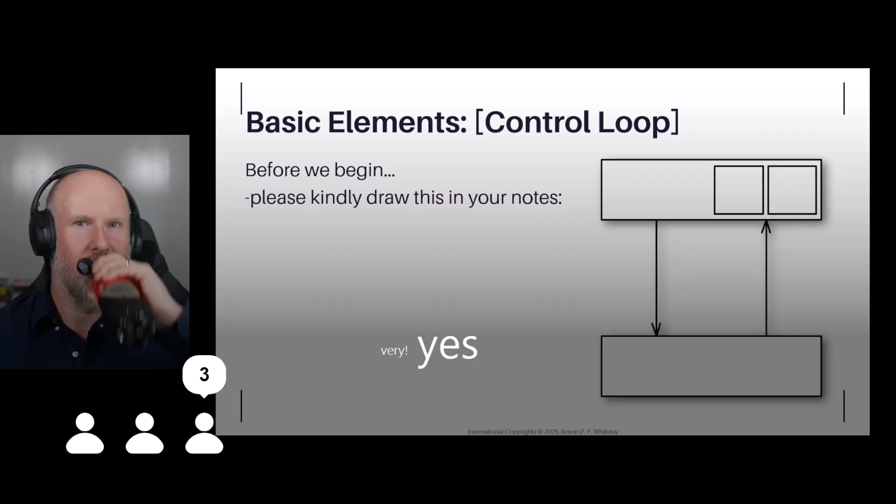Okay, that's good. Right, so this is a very basic control loop. And this, for me, is one of the two main core concepts of what STAMP, STPA and CAST are all about. If you can master this concept, it will move things on tremendously. So what we've got at the top here is what's called a controller. That controller can represent a human, an organization, a group of humans, a technical controller, a software controller. And of course that controller has some form of decision making within it, which helps the controller decide what control actions and when those control actions should be provided. Those control actions are provided to a concept called a controlled process.

Now, if you imagine you driving your car, you are the controller. The control process in this case is the movement of your vehicle from A to B. You're directly in control of your car and you provide control actions and receive feedback from the car and your environment, which helps you make decisions about how fast to drive, whether you should press the brakes or turn your headlights on or off. You also have beliefs about that control process and about yourself and your capabilities. Those beliefs, more formally, would be referred to as a process model, or mental models if we're talking about a human controller.

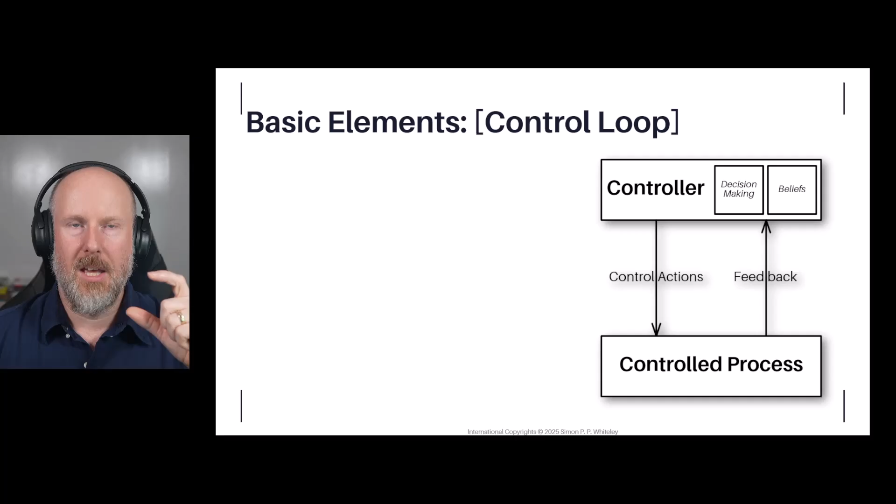And this, for me, is the most important core concept of STAMP. I like to talk about this in the context of being a jigsaw piece. Whenever we're doing any kind of STAMP-based analysis, whether it's STPA or CAST, we're looking to identify these jigsaw pieces and then see how they fit together in an overall control structure model, an overall jigsaw.

So this is why I like to use the second metaphor of a jigsaw puzzle. When we're trying to build a control structure model, they're essentially made of all little jigsaw pieces, little control loops, little control structures, and how they fit together overall. You'll see in a moment some examples of that when we get into the case study.

So on a scale of 0 to 10, what I'd like you to do is type in the chat how familiar you are with systems engineering as a concept or discipline. If you don't know anything, it's 0. If you know everything and could teach a course on it, type 10 in the chat. Over time that number will stabilise. Bear with me.

So we've got some good numbers in there. We've got a few lower numbers, we haven't got any zeros so far or ones, so that's good. That's fine, Mark, I can deal with that. That's good. Jose says 10, but he's always learning.

Great, Jose, fantastic. Okay, so in terms of systems safety engineering as a discipline, on a scale of 0 to 10, give me an indication of where you are. 0 is you don't know anything, 10 is you could teach a degree on it. Got some 10s, some 6s, some 10s, yep, okay, that's good. So that's a bit more variable, that's okay, it's not an issue.

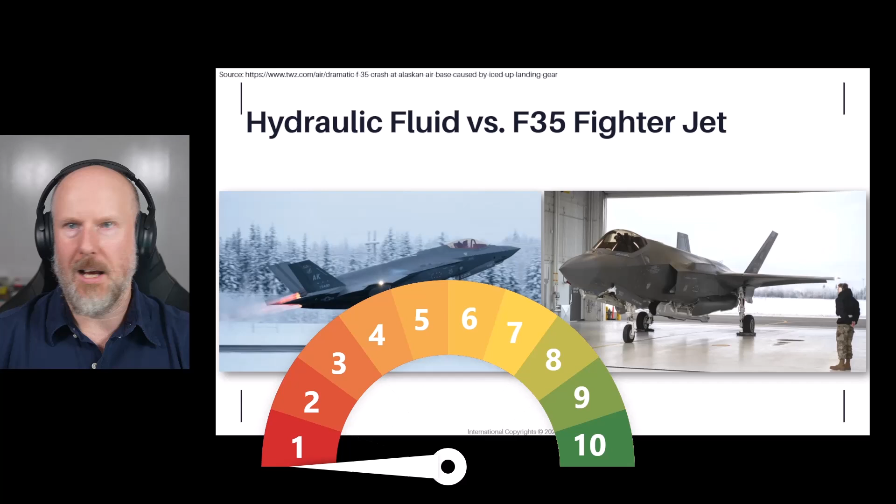So fantastic, okay, so on a scale of 0 to 10 then, how familiar are you with this accident? Have you read the report? Have you watched the 5 hours of live streams the other week going through the report? So Ruben's got 0, thanks Ruben. Martin's got 1, that's fine, no worries. James has got 8. Great, James can lead the session, I think.

Thomas has got 4, Raji's got 0. That's fine, that's not an issue. We could talk about it.

So it's about this aircraft. If you're not familiar with this aircraft, this is a Lockheed Martin F-35. I was just about to say Joint Strike Fighter, but that's not the right name anymore - Lightning II, I think it is. And having seen it at the air show, it is very loud, absolutely mind-blowingly loud. Single engine aircraft, very cool looking, very stealthy. And the F-35B variant, the VTOL, vertical takeoff and landing variant, is a sight to behold. But this is the A variant, a conventional takeoff and landing aircraft.

Now, these pictures are borrowed from the website of the news article when I was first aware that this report came to being, and these pictures are representative of Eielson Air Force Base. So in January, it's clearly very, very cold and wintry. And on the right-hand side is a picture from inside the air-conditioned, climate-conditioned hangar, so it's kept in a nice warm environment so people can work on it and not be exposed to the harsh environment.

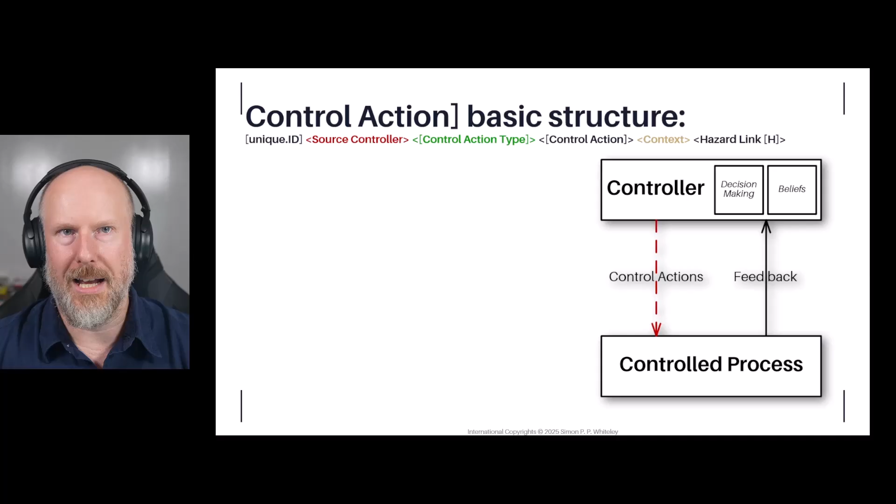I'm not going to go into too much detail since we've got a lot to go through, but these are the general types of unsafe control action. All control actions are broken down into four categories. The first is the control action is not provided when it is required. So if you don't provide the control action when there's somebody in the road, that's a control action not provided with that context.

But there are other versions of provided. So if instead of the brake command you provide the accelerate command with that particular context, is that unsafe? Well, yes it is. But is there a particular variant of that provided control action?

We've got timing - timing early, timing late. So if we provide a brake command too late, or don't provide it long enough, that's too short or too long. And for particular types of control actions there might be a sequence involved. If you're thinking about ready, aim, fire with weapons - if you fire before you're ready or before you've aimed, could that be dangerous? Yeah, probably.

And then finally, magnitude. Magnitude is a special case that's not included in the official literature, but I always include it to emphasize that if you're working on a system with analog controls or analog feedback, or interactions that involve magnitude, you might want to include that as part of considering your unsafe control actions. But as I say, it's not officially part of the literature.

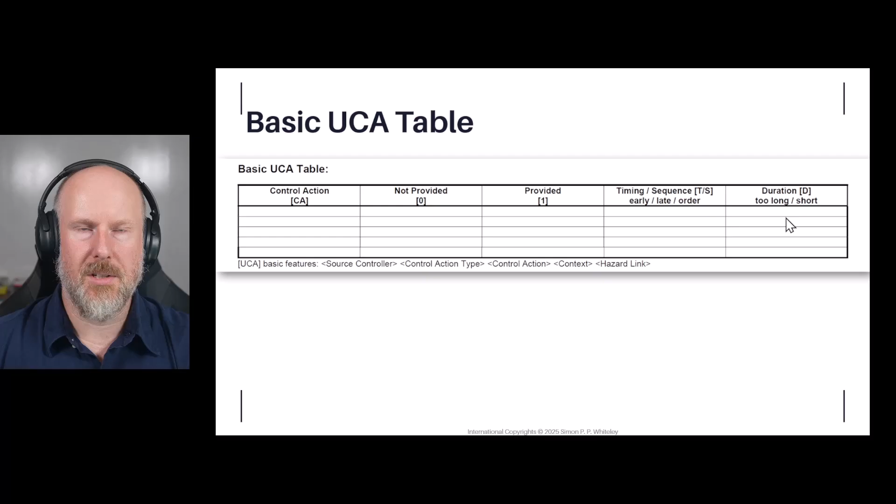And then when we do the control loop analysis, the causal scenario or loss scenario analysis, this is where we look at the different elements of the control loop. Here we look at the controller behavior itself - why does it make sense for the controller to provide that unsafe control action? What issues does it have with its control algorithm or decision making? What about its beliefs or its process model? And then also, what about the sensors or feedback? Is the feedback adequate or inadequate? Are there any delays, or any other data or information that's missing, incorrect, or perhaps lying? And then we've got the control action path.

So how does that control action make its way from the controller to the physical control process? What actuators are involved? Perhaps the actuator provides the control action when the controller hasn't provided the control action.

And that's a completely different scenario to if the controller provides the control action, but the actuator doesn't then enact that control action. And then finally, we've got the control process at the bottom.

What are the aspects of the control process where it might behave as though it has received a control action, or has not received a control action? And of course, are there any other external disturbances that are not directly related to this control loop?

And then in terms of results from hazard analysis, we've got the high-level safety constraints I mentioned earlier on, the control structure architectural constraints, the controller functional safety constraints, and then the safety constraints for the control loop, the feedback, the sensors and actuators, things like that. And they're broadly labelled as stamp-based analysis constraints, if you're doing an STPA.

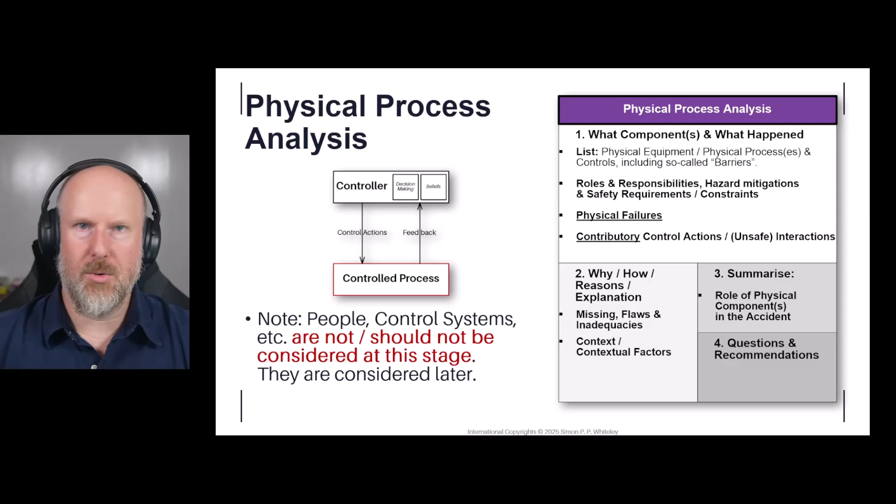And you might identify questions and make recommendations that, as you start to learn more about the control structure and the behavior of certain controllers, might change those questions, might answer those questions, or the recommendations you might make then become invalid later on as you progress through the analysis. And then in terms of the second and third part of the CAST analysis phase, we have what's called in the literature component analysis or controller analysis, because we're looking at the controllers in the structure.

We identify what safety-related roles and responsibilities they have, any explicit safety requirements or constraints. We'll then explore their control and feedback ability. What are the issues? Were there any issues with actuators and sensors, or any failures? So we're looking at the controller, actuators and sensors perhaps.

Then we've got contributory control actions or interactions. You'll notice that this is different from STPA. We're logically talking about exactly the same control actions and whether they contributed to the accident or not. But of course, when we're doing an STPA, this is before the accident. So when we identify a control action that will lead to a loss, that is clearly an unsafe control action.

But in the context of a real accident, you might have a situation where a controller provides a control action, believing that it is the right thing to do, the safe thing to do, but that actually contributes to the accident. And of course, they wouldn't know that it contributed to the accident before they did it, because if they did, with hindsight, they would not have logically done that.

So this is why it's important to recognise that contributory control actions in CAST and unsafe control actions in STPA are logically and functionally the same, but we just have to be careful about how we treat them post-accident, because we don't want to suffer from hindsight bias. We want to reduce the potential to be overwhelmed by hindsight bias.

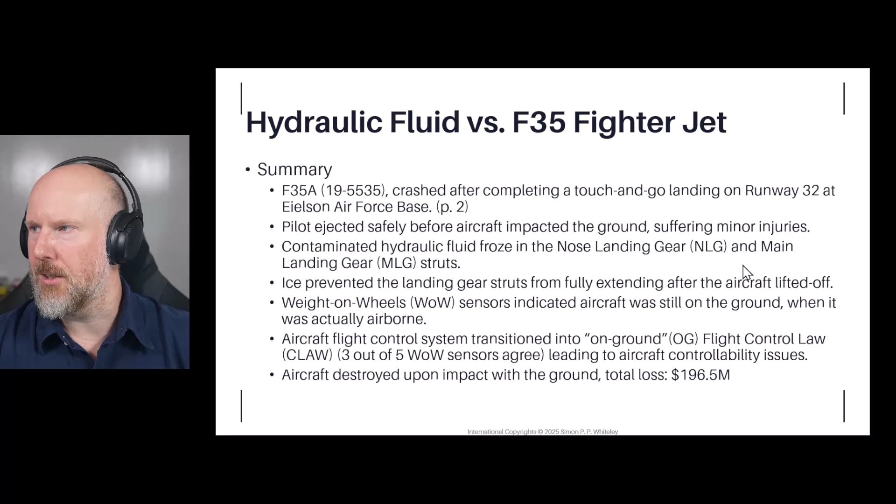Ice prevented the landing gear struts from fully extending after the aircraft lifted off. The weight on wheel sensors indicated the aircraft was still on the ground when it was actually airborne. The flight control system transitioned into on-ground flight control law. Three out of five weight on wheel sensors agreed, leading to aircraft controllability issues. The aircraft was destroyed upon impact with the ground, with a total loss of $196.5 million. So it's quite a big, expensive accident, this one.

I think everybody's quiet. Either I'm doing a great job or I'm not. Let's move those things out of the way so I can see what's going on. So Aidan said something, there we go, let's get that on screen.

Aidan says the hydraulic barrel was left outside in inclement weather for at least 6 weeks. This was in direct violation of Air Force regulations, which require that hydraulic fluid be stored in a container tightly closed in a dry and well-ventilated place. Additionally, the hydraulic barrel used to service the aircraft had been marked empty, consumed in April 2024, but had not been disposed of. Even so, it was in use, and when tested it contained about 33% water. So that's, in a nutshell, the cause of the accident.

But there's more to it than that, and we will see that as we go through this case study. So let's go to this bit. Slides, large. No, that one. There we go.

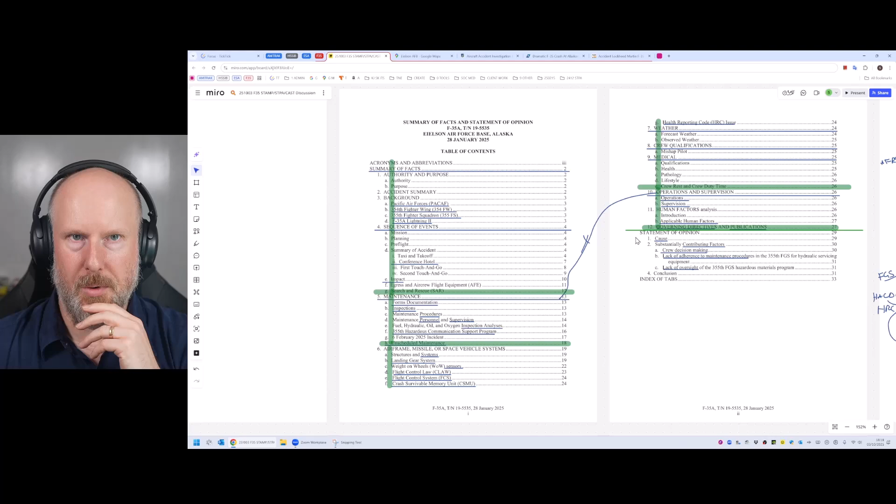Jose says he didn't have time to study it, but weight on wheel sensors and CLAW called his attention. Absolutely. So what I've done here, if you've seen the videos at all, is essentially I went through the official investigation report with a marker pen, underlining things and talking through it, working through it over the course of about 5.5 hours over 2 or 3 days. As I went through it, I extracted relevant information that might make sense for the control structure, bearing in mind that if you're doing this as part of a real investigation, you will receive notification that an accident has occurred with some initial information, which is pretty much always going to be wrong. And of course, when you're starting your control structure, you will identify candidate controllers that might or might not be relevant to this accident, and whether you want to include them. So what I do is identify them as jigsaw pieces and put them to one side.

And then as I get more information, I will take those candidate controllers and start arranging them in a broad hierarchy, and then see what the interactions are, what the control actions and feedback are.

James has made a point: hydraulic fluid is hygroscopic. So why is ice formation with contaminated hydraulic fluid a surprise and not checked at every service? That's a fantastic question. That's not addressed in the investigation report.

James says its text is hard to read. Sorry James, I was just quickly going over the report itself to give you a view of what it looks like, not in detail. So this is the layout of the airfield.

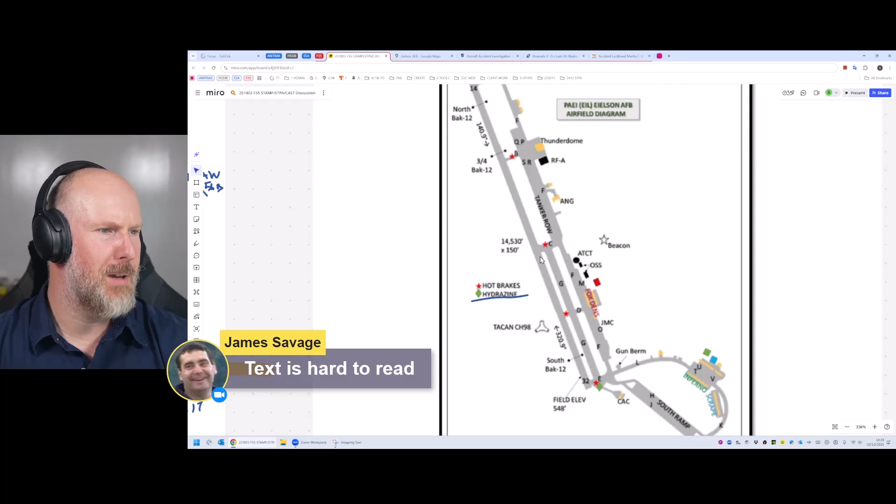I can't remember where the impact location is. I think it's... where is it? Oh no, that's not it. I thought they'd marked it on this. Maybe it's marked on a different one I've seen. But that's the overall runway layout, airfield layout.

Yeah, so it's quite an extreme thing to witness. When I first saw it, I was shocked. The first thing that struck me is, why is it falling out of the sky, tumbling down? There's something wrong with the flight control system if it's doing that.

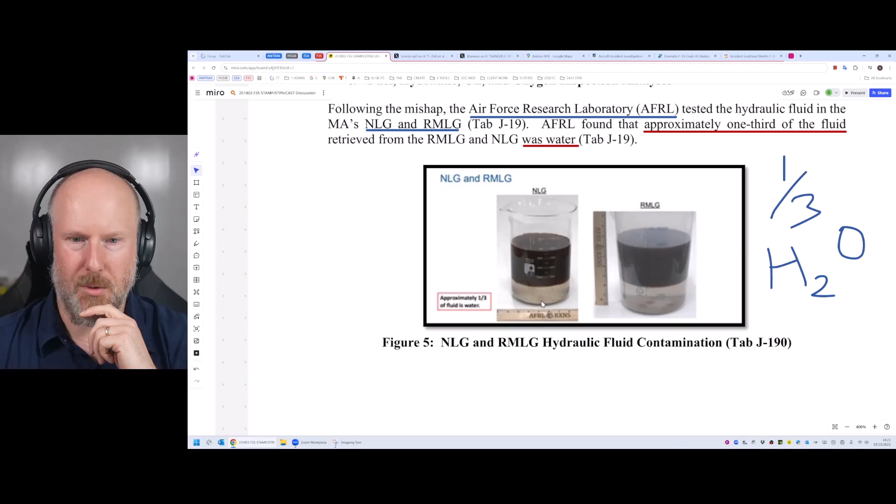So yeah, and then we go across to this picture here. This is a bit of a better picture. This is the nose landing gear fluid, and then this is the right main landing gear fluid. Again, it's not good at all, it shouldn't be like that.

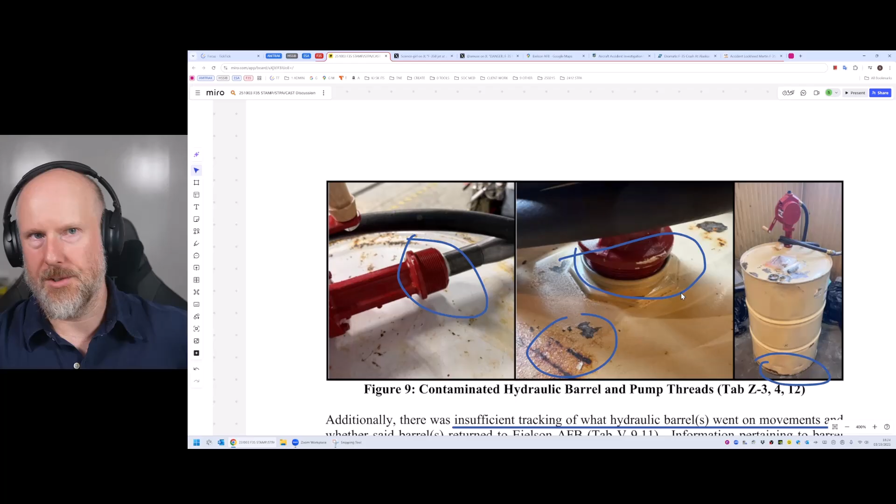And then this is the barrel, the hydraulic barrel, and you can see for yourself the barrel is in a bit of a poor state. There's surface corrosion, paint chips, it looks like it's been banged up a bit. And then this thing on the top, this is a hand pump to dispense the fluid out of the barrel into the maintenance cart, the hydraulic servicing cart. The thing I've highlighted there is that the threads on here are supposed to be sealed so that when it's in the barrel, there's a watertight seal. For whatever reason, not explained in the investigation report, that's not present.

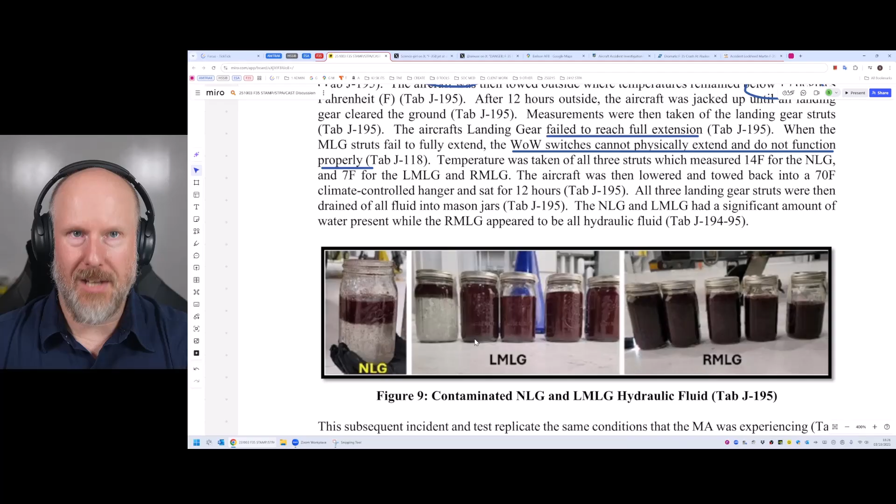So they didn't even know. Their mental model was that they didn't know there was an issue with the landing gear. So in my view, they were very lucky, I think. And on that aircraft, they also checked the contamination and found that the nose landing gear and left main landing gear was contaminated, but the right main landing gear was not. So this is a common mode of potentially losing aircraft.

These are the weight on wheels sensors. Now, there's a difference between the nose landing gear sensors and the sensors on the main landing gears, in that the nose landing gear sensor is a weight off wheels sensor, not a weight on wheels. So the logic that it provides to the flight control system is that we are off wheels, we're not on the ground, whereas the main landing gear has 2 sensors per landing gear that say there is weight on the wheels.

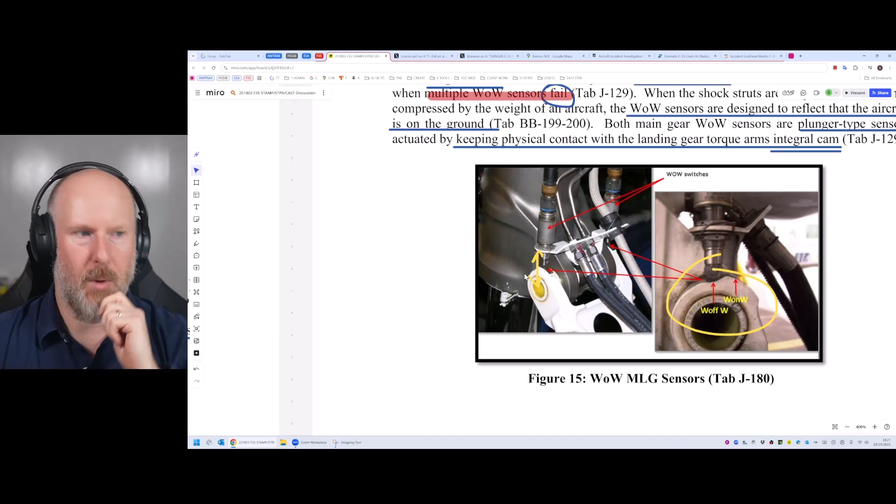Okay, what else can we say? Yeah, there we go, there's a better picture. So these are the 2 sensors there, and when the landing gear mechanism moves, they press the weight on wheel switches and they indicate weight on wheels. And there's the nose landing gear there. So it's a Hall effect sensor, and it's about weight off wheels, not weight on wheels.

Right, okay, so let's go over to here then. Like I said, I always start with this jigsaw piece. So whenever you're doing any kind of STAMP-based analysis, start with this jigsaw piece and build up from there, and then think about putting these pieces together into a control structure model.

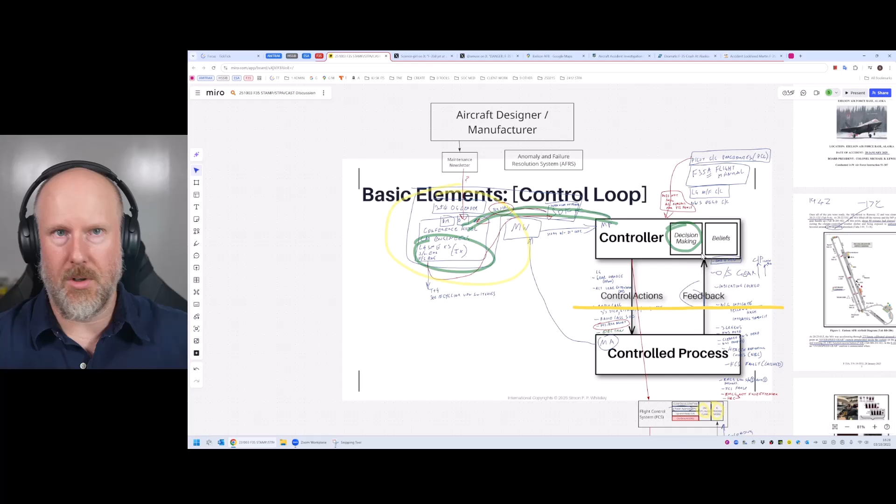And so in the case of the pilot, I essentially started at the front of the investigation report and started to pull out what controllers were involved, scribbled them on here. That gave me a preliminary idea of what the control structure looks like and what the potential unsafe interactions are.

And then also I did the same for the maintenance of the aircraft. So the hydraulic, putting hydraulic fluid into the landing gear using the hydraulic service handcart, which is filled up from a hydraulics barrel. Excuse me. But it wasn't clear in the investigation report who else, apart from the maintenance team, a level 5 and a level 7 maintainer, there were other people implied but not actually mentioned or apparently investigated.

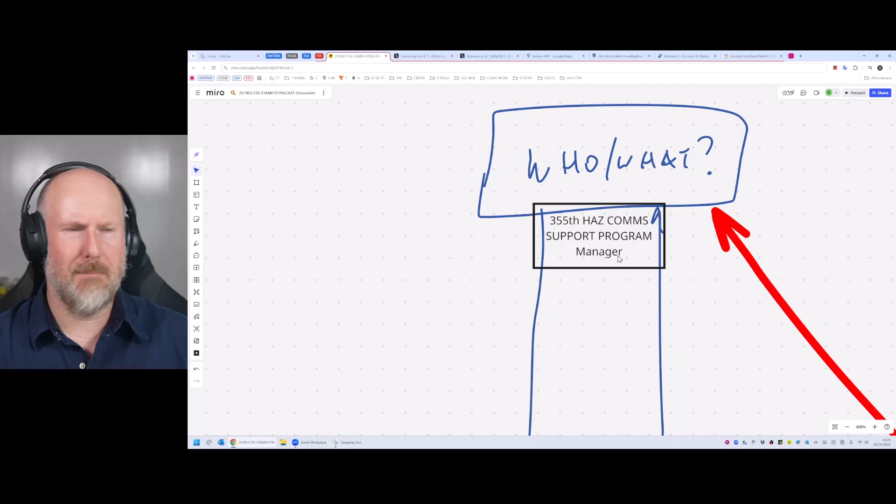There was a mention about the 355th hazardous communication support program manager, who wasn't in post. There was no one in that position. So arguably, that part of the control structure, there was nobody present. So it's hardly surprising that there were some issues.

So I essentially redrew those a bit smarter, a bit nicer. It's a bit more complex because I've added some detail to it. As I mentioned before, when you're doing your control structure modelling, it's a good idea to start with a very basic control structure, 3 boxes with a couple of arrows, nothing more complex than that, and then start to add details. You learn more as you start to understand more, and you go through iterative phases of adding detail and removing detail and refining it until you have a good control structure model that you can use for the basis of your analysis, and of course communicating with others.

Because when you're doing your own stamp-based analysis, you want a master model that captures all the information that's relevant to you. And then, when you're going to write this into a report or an investigation report for other stakeholders to review or consume, if you're going to publish a report in public, you're not necessarily going to want to publish your detailed control structure model because it's sensitive. You will want to publish something that's a bit more abstract. So you have to think about how you're going to model it. It's not straightforward. It comes with time and experience. But once you develop that skill, it'll become second nature.

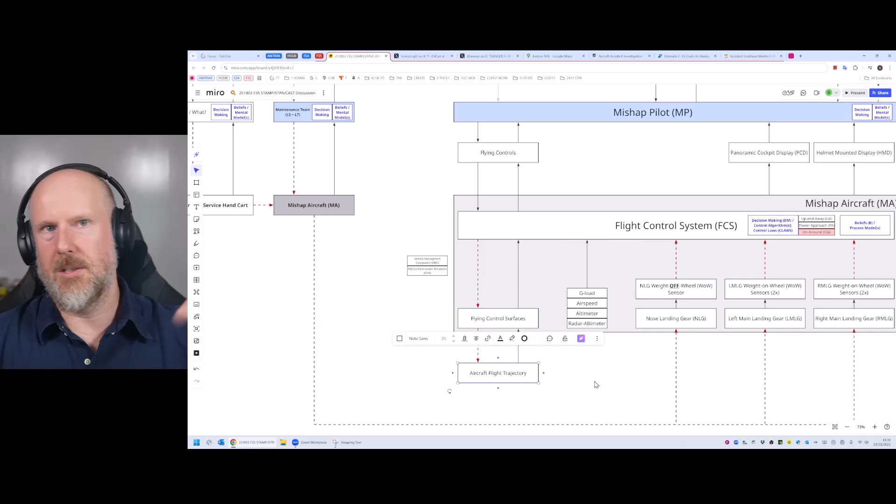So what I've got here is I've started with the physical process, which for this whole accident is about aircraft flight trajectory. Because ultimately we're talking about an aircraft that needs to fly, complete its mission, return to base and land safely, and everyone gets home safely. Now the flight trajectory as a physical control process is influenced by the flying control surfaces. I've not included the propulsion system, the engine or anything to do with that because it's not discussed in the report and I'm not convinced it's relevant to this particular accident.

If we were talking about the F35B vertical takeoff and landing example that you saw the video of a moment ago, we might want to include that in this control structure, but we're doing it for this accident, not for the F35B. So the flying control surfaces are under the logical control of the flight control system.

Now the flight control system has the same control algorithms, decision making and beliefs process model as a human controller, but in this concept it's more appropriate to refer to them as control algorithms. In fact, in the investigation report it refers to them as control laws, or claws. It mentions explicitly three types of control laws: the up and away, the power and approach, and then the on-ground control law.

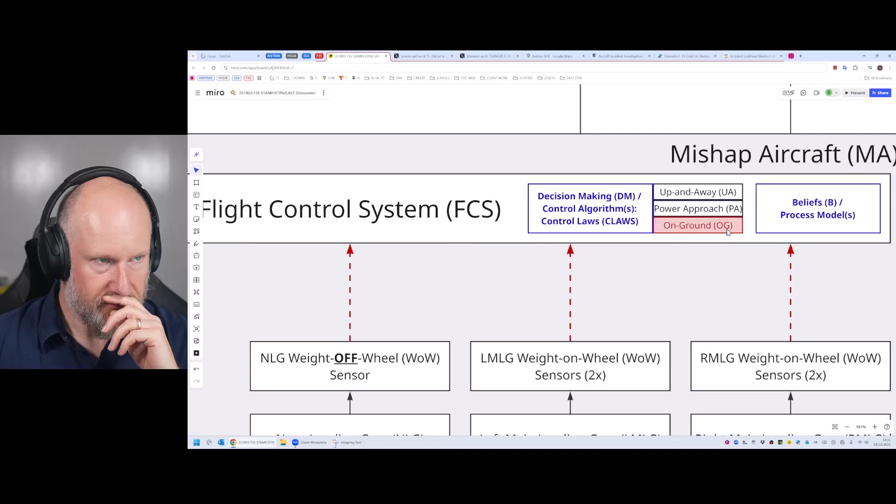Now the report talks about the weight on wheels sensors, so I've modelled them explicitly. You don't have to do that, I've just done it for effect here. So we've got the nose landing gear, we've got the weight on wheel sensors, and I've highlighted the nose landing gear as a weight off wheel sensor.

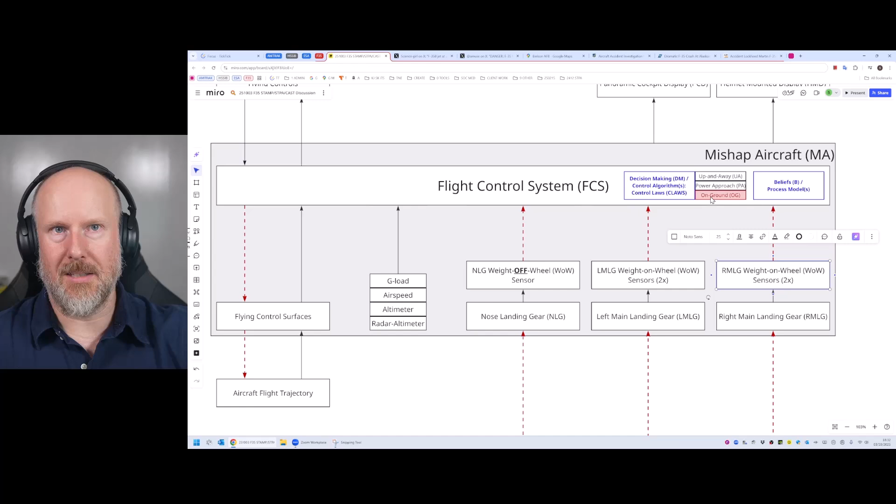They provide critical feedback to the flight control system. That flight control system updates its process models about the state of the aircraft, whether it's in flight or on the ground. So it believes, based on this apparently valid information, 3 out of 5 voting, that it is on the ground when in fact it's not. And so its decision making algorithm decides, based on that belief, that process model, that it needs to enter into on-ground mode control laws.

And it does that, and when it does, it starts moving the flying control surfaces as though it is on the ground, which if the aircraft is in the sky, is really not appropriate. It leads to an uncontrollable aircraft and a loss of $196.5 million. So fundamentally, straight away, from an aircraft perspective, we've identified the causes of the accident: unsafe control actions by the flight control system because it legitimately believed, in its context, that the aircraft was on the ground.

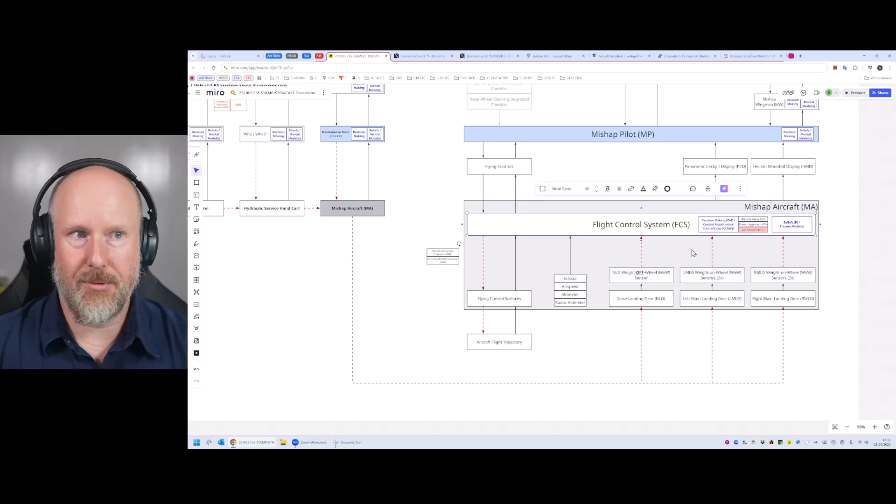So there's an immediate question there for the designer of the flight control system. Why does it make sense for the aircraft to select on-ground when it's actually in the air? What other feedback do those process models, those beliefs, have about the state of the aircraft to protect it from this precise scenario? Now, of course, they're not going to include that level of technical detail about a fighter jet, a military system, in a report like this because it's publicly available.

But if I was part of the investigation team, and I'm hoping you all, as part of the work that you do, will be able to ask questions like: well, hang on a minute, what feedback updates this beliefs process model? And do those false beliefs contribute to unsafe control actions on the part of the controller? And if they do, have we got a design issue here? Do we need more feedback to give us confidence that we're actually in the state that we are?

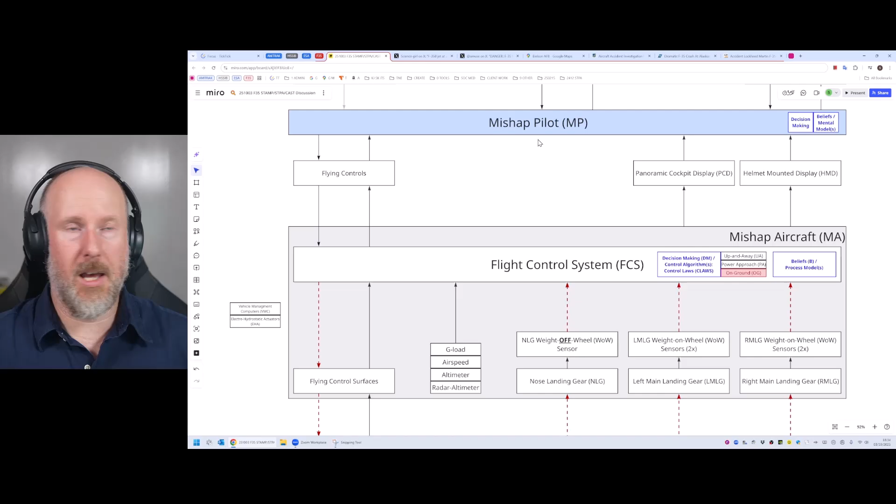Maybe we might also want to consider aircrew override capability. Can the pilot flip a switch that says we're definitely flying, we're definitely not flying? I'm just postulating there, but I'm hoping - in fact, tell me, what are your thoughts about this? I can bring you up and we can talk about it. Just type in the chat or raise your hand and I'll bring you on.

Jose says it reminds him of Air France 447. It is, it literally is.

I should probably do an Air France 447 case study, but it's such a huge investigation report, it'll take absolutely ages to get through. But looking at the summary of that accident, it's similar. In that accident it's also related to the crew - they were led to believe they were not in the state they actually were because of feedback from the aircraft. So there was not only a control system flaw from the flight control system perspective, there was also a flaw in the human-machine interface design of that aircraft.

Any other comments, questions, concerns, compliments? I'll keep going up the controls. Oh, someone else has said something.

James said something - there have been several other accidents where there has been similar mismatches involving WOW. Yes, there has, absolutely. WOW is particularly problematic. How much can I say?

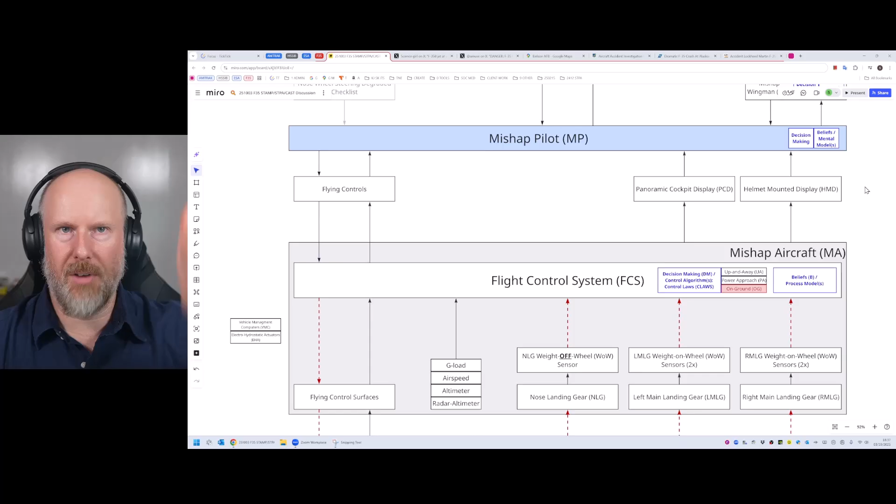I've been involved in some analysis of WOW-related fault tree analysis about 5 years ago now, maybe 5 or so years ago. It's not an easy thing to do because in that context I was doing analysis on the part of a subsystem supplier. The aircraft manufacturer did their own analysis and fault trees and decided their architecture for the weight on wheels system. But when I was doing the work, doing a bit of pseudo STPA in combination with fault tree and FMEA, I identified that perhaps their signal to us was not of sufficient integrity for the benefit of the safety critical functions we were working on. And of course that suggested the aircraft design for the weight on wheels signal was not adequate. But we didn't have full visibility of the aircraft manufacturer's architecture for that design - they only gave us a limited amount of information in the interface control document. So in this case I've not explicitly discussed the design control structure for the aircraft.

And in fact that is something we should probably talk about now. Ruben, I think you mentioned that - Ruben, are you still here? Ruben, you asked about... there we go, let's have a look. So Ruben says... probably not mentioned on the public report.

Looking at the flight control system software designer's mental models as a controller of the flight control system would probably shed more light on the causal factors.

Absolutely. In this context the only information we've got is in the official investigation report. But amongst the people in this room, I'm sure we can come up with some ideas as to why it would make sense for the flight control system designer and their software engineers to design their algorithms the way they are. It may literally be that the flight control system software engineers were told: these are the up-and-away, power approach, and on-ground algorithms. This is the only available feedback to you because of other constraints on the design of the aircraft.

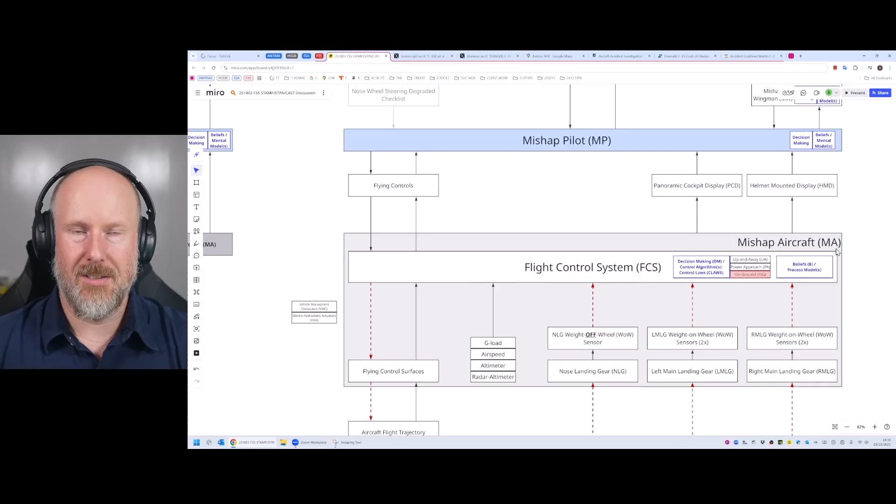I don't want to... let's play devil's advocate a little bit. Maybe, and I don't know how this works - I think someone else in the call knows a lot more about landing gear than I do - but if you're buying the landing gear from a supplier and that supplier says 'this is our standard landing gear for a fighter jet of this performance and these requirements, it only comes with weight on wheels of this design, if you want more than that for the benefit of your flight control system you need to give us $10 billion or whatever it is,' then maybe that's the reason. Or it could be that, and we can't know, but I'd guess there may be other flight control system reasons why they can't do that.

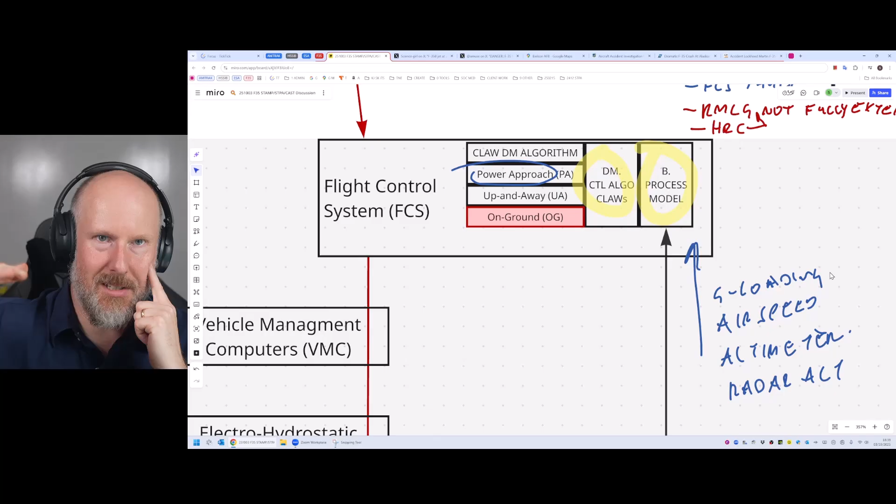Maybe... well let's say for argument's sake - in fact I drew it, I wrote it, there it is, that's what I wrote. So I said, well what about adding G loading? Because if you're on the ground I'd like to think the G is going to be relatively stable, depending on how hard you hit the ground and how much wobbling you do before coming to a stop. But if you're moving in air you're going to have a greater variance, with smoother performance on the curves of G.

What about airspeed? If your airspeed is above 250 knots or whatever it is, clearly you're not on the ground if you've got an airspeed of 250 knots. And I know for a fact that airspeed is going to be a high integrity signal, high integrity data from multiple sensors on board the aircraft, probably diverse sensors.

And then what about altimeter? Is there any altimeter data they could use? Or radar altimeter data? I know in some civil aircraft designs, Jose and James mentioned earlier, there are other accidents with things like thrust reversers, where the aircraft has believed that it's in flight when actually it's on the ground, and the pilots are trying really hard to get the thrust reversers to work when it's heavy rain, the aircraft's heavy and windy, and the thrust reversers have not deployed. They've departed the runway and killed everybody. So weight on wheels is a critical thing, but what other elements, other feedback could the designers include? Or maybe they attempted to include it, but for other reasons couldn't. I don't know, but that is certainly something I, as an investigator, would want the team to go and look at, to explore.

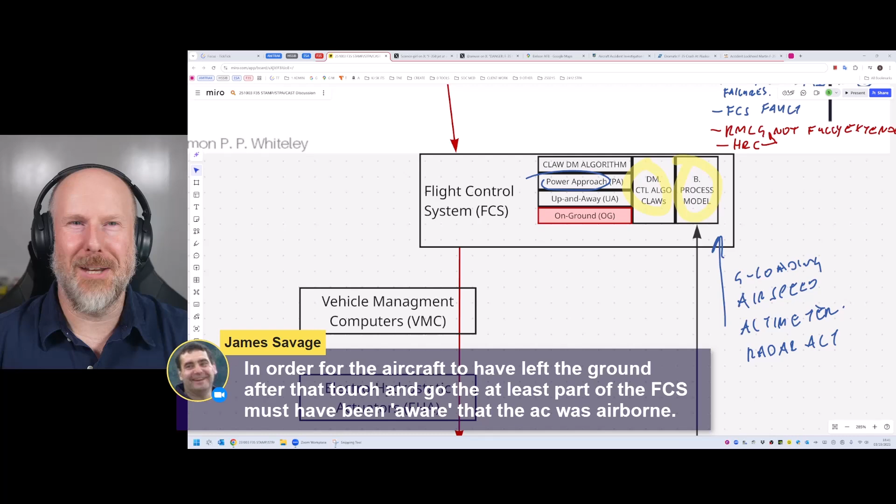So Ruben says yes, +1. James says, in order for the aircraft to have left the ground after that touch and go, at least part of the flight control system must have been aware that the aircraft... the only way we'd know that, James, is if we had someone who knew about this flight control system, but then this meeting would be classified. But yeah, absolutely, that's it. What else can I say about that?

So going back to this one over here, I've just modelled that very basically. For me, that is the key to this accident. If we then move up the control structure, there's some other interesting points.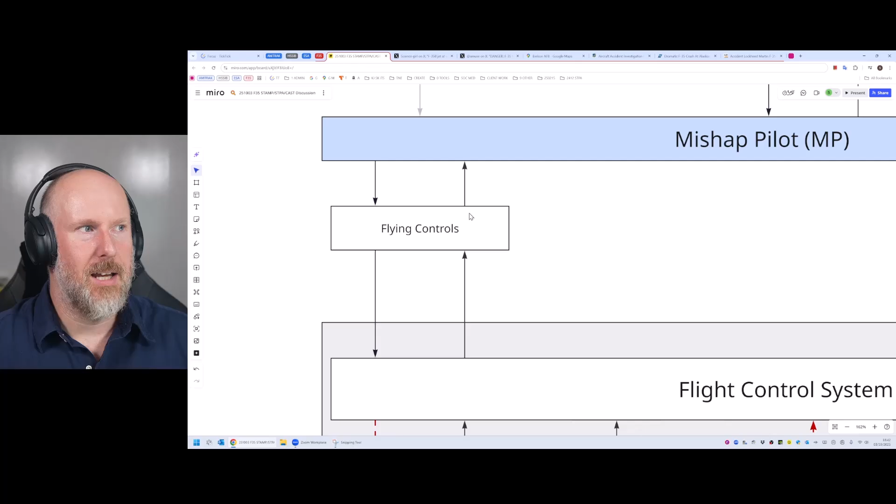So the mishap pilot interacts with the aircraft through some flying controls, providing inputs to the flight control system. I am assuming the flight control system gives them some kind of feedback. If you're familiar with Airbus aircraft with twin pilots, commercial aircraft, Jose mentioned Air France 447. They're not like Boeing aircraft. Boeing aircraft, some of the older ones, pilots can actually feel on their control column that their second pilot is actually moving as well. Whereas on stick-based controllers, like on the Airbus aircraft, you can't actually tell whether there's people putting multiple inputs in. I think they do come up with an alert that says, hey, the other person's trying to provide stick inputs, and they have to coordinate their control.

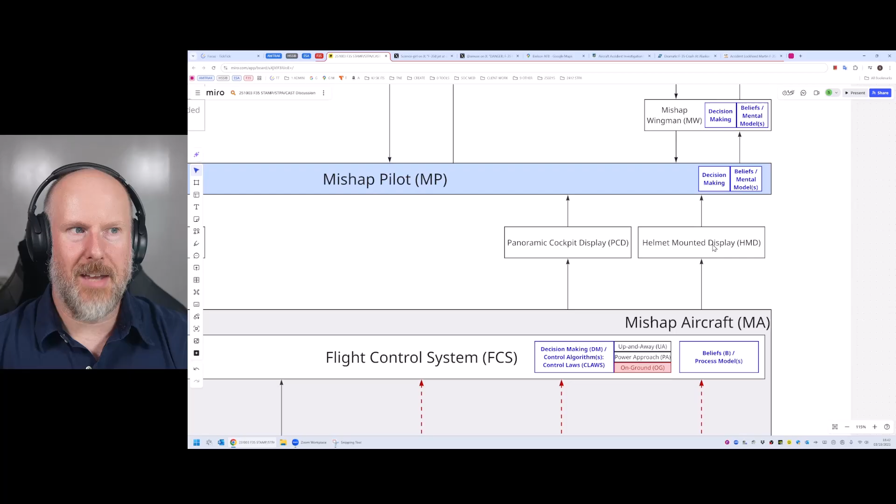But that's from a feedback perspective on the flying controls, I'm imagining the F35 has some kind of feedback to the pilot. They also have the panoramic cockpit display and the helmet mounted display, and I've modelled them here as feedback paths to the pilot, and clearly they update the beliefs and decision making of the pilot about what they're going to do about the aircraft.

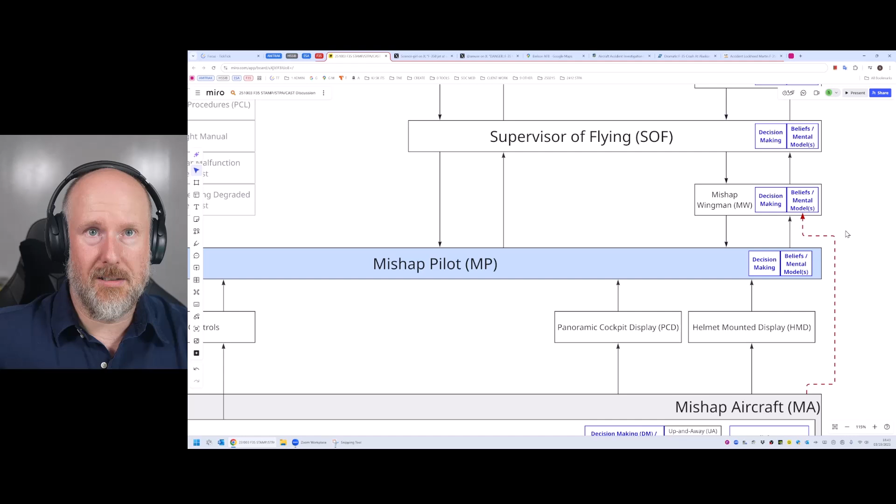I've also modelled the mishap wingman, because clearly they had... in fact I'm missing a feedback loop from the aircraft there. I should have a feedback path from there to the wingman, because clearly they're the person that spotted that there was an issue with the aircraft. So I've just added that on there. If he'd not spotted those issues, like in the second near miss they had 8 days later, things could have been a lot worse. It could have been a lot worse for this pilot.

Then we have the supervisor of flying. They interacted with the 354 operations group leader and the conference hotel, which was a conference call while the aircraft was still in the sky, with the manufacturer. So they had a team of people on the call giving advice and doing fault finding and recommendations for the mishap pilot. Now, if I go over here, there was actually a landing gear subject matter expert, 3 of those. There was a software engineer and a flight safety engineer in that conference call.

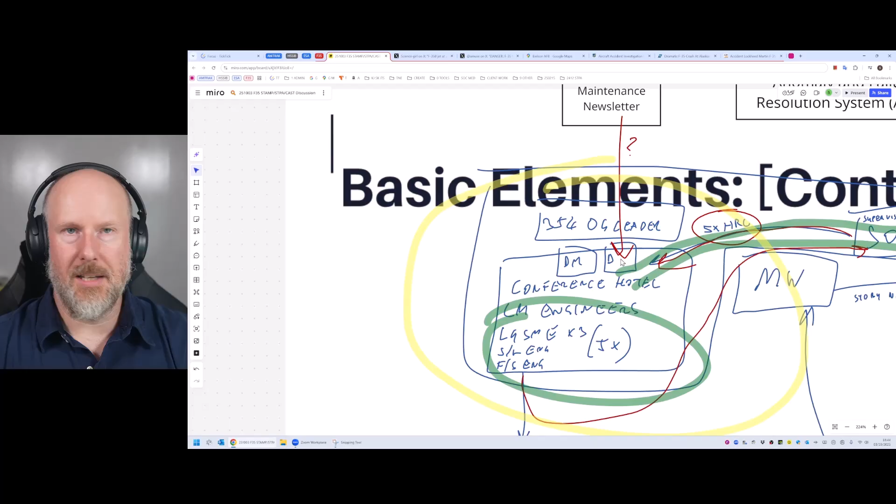Now, one of the things that's interesting, mentioned in the report, is they were not aware of a maintenance newsletter issued 6 or so months prior that actually highlighted an issue such as this. They weren't aware of it, and didn't realise that issues such as this could lead to loss of the aircraft. It's important to recognise this maintenance newsletter was published months prior, but it didn't emphasise that issues of this nature could lead to loss of the aircraft. It just implied it might lead to controllability issues. So anybody reading that would not have realised, hey, this is actually going to lead to loss of the aircraft, we need to do something serious here. The other thing to emphasise is this conference hotel did not have any flight control system competent people in the call.

So they'd not identified that this might lead to loss of the aircraft. They'd just assumed it was a standard landing gear issue and they could have a go at landing, and if they can't land, then they're probably going to have to eject.

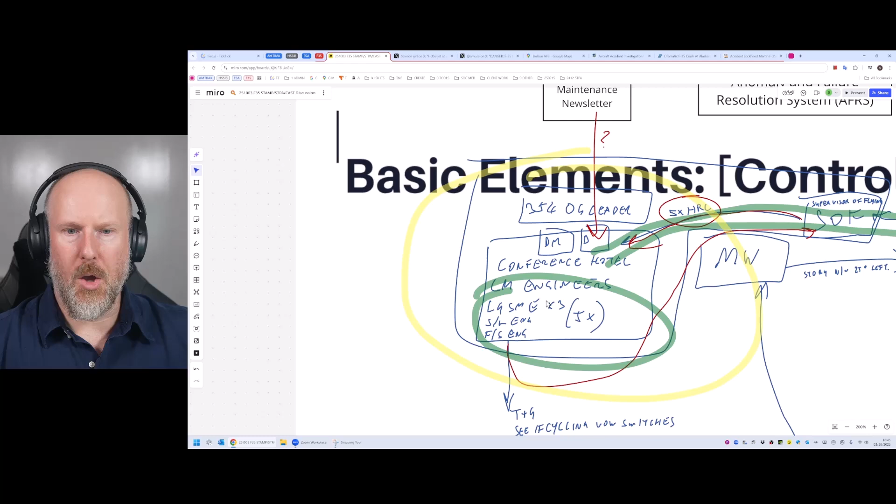It doesn't appear, from what's in the investigation report, that it actually related to a potential for loss of the aircraft. So there's questions there over, well, who designed this thing called a conference hotel? Who decided who the people should be in that room?

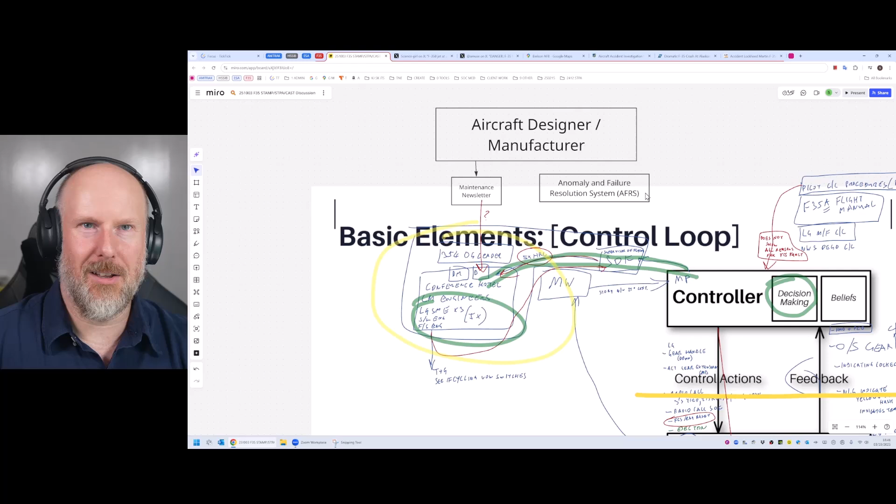How was that part of the control structure actually set up? It's important to emphasise that the mishap pilot was coordinating with this conference hotel via the supervisor of flying, talking to them on their personal phone. So even this, it was just a phone call. It wasn't like a high integrity data link with live data or telemetry or anything like that. It was just a phone call: hey, we've got this $200 million fighter jet flying around with problems with landing gear, can you just give us a hand, please?

James says, I say that simply because it managed to defeat gravity and get some considerable height before the pilot had to eject. The idea that it managed to use residual speed or other magic to get that high is a bit far-fetched. I think, if I recall correctly, the investigation report talked about the pilot essentially trying to take off again, and then almost immediately after takeoff they lost control of it and it ascended to a significant height before it then came back down again. I think it's in this part actually.

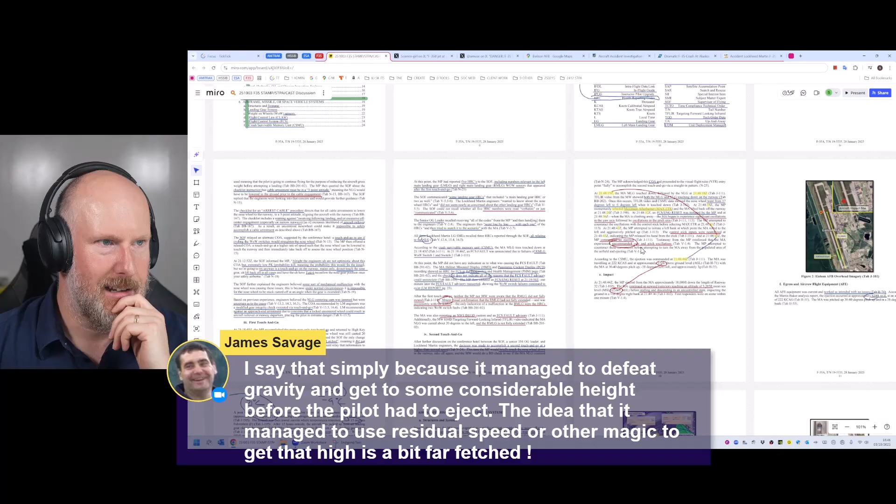So, second touch and go. After further discussion on the conference hotel between the supervisor of flying, a senior 354 OG operations group leader, and Lockheed Martin engineers, the decision was made to accomplish a second touch and go at a higher than normal speed. So this conference hotel, they made a decision using an unspecified control algorithm in the investigation report to decide it was safe to go and attempt a second touch and go.

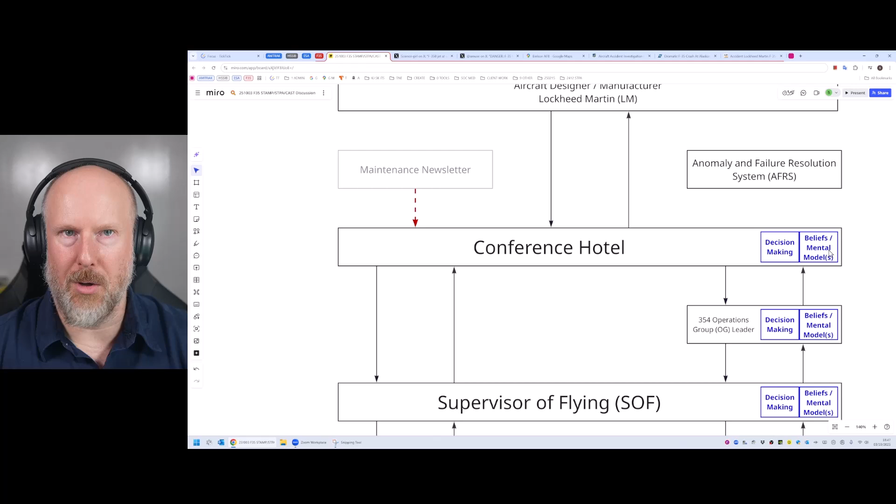So logically, their belief must have been there's no issue with the flight control system and the landing gear system that's going to lead to loss of the aircraft. If they had an accurate belief, mental model, then they might not have suggested a second touch and go. And again, that's the maintenance newsletter there.

Had they been aware of that maintenance newsletter, perhaps they might have made a different decision. And that's what the official investigators concluded at the end: basically, if they'd have known that this maintenance newsletter existed, they might have made a different decision, which in hindsight, it's not fair to say. And again, the maintenance newsletter was not emphasising how serious it was. So in fact, I'll just jump back over to the maintenance newsletter over here.

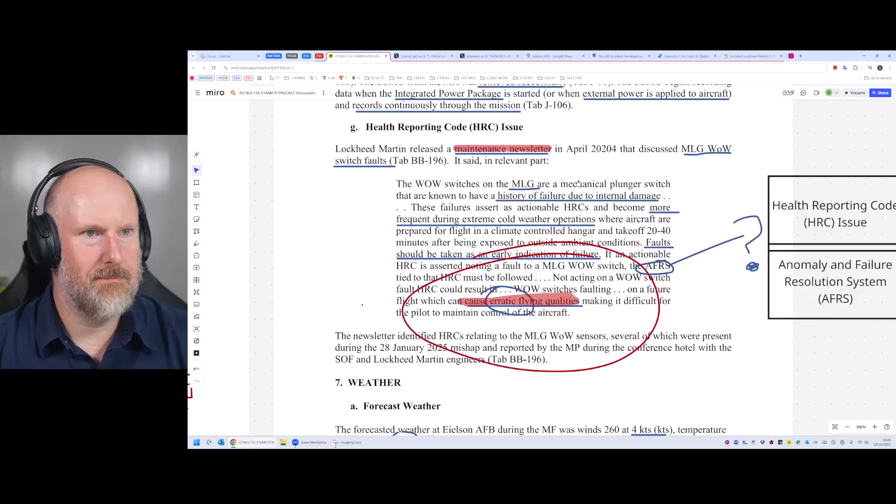So Lockheed Martin released a maintenance newsletter 9 months earlier that discussed main landing gear weight on wheel switch faults. So it's focused on switch faults, not on flight control system logic. The WOW switches on the main landing gear are a mechanical plunger switch known to have a history of failure due to internal damage. So this is about the failures with the weight on wheel switches themselves, not related to this scenario, which is the switches were working fine.

It's just the landing gear wasn't decompressing properly. These failures assert as actionable health reporting code issues and become more frequent during extreme cold weather operations, where aircraft are prepared for flight in a climate-controlled hangar and take off 20 to 40 minutes after being exposed to outside ambient conditions. Faults should be taken as early indication of failure. So if the people involved in the accident were aware of this, they might have assumed that it was an issue with failures of the sensors themselves, not that the sensors were working and it was something else.

So in terms of beliefs, mental models, that might explain why they suggested to continue what they were doing. They might have believed it was just weight on wheels failures, switch failures. In an actionable HRC, health reporting code, if an actionable health reporting code is asserted noting a fault to a main landing gear WOW switch, the anomaly and failure resolution system tied to the HRC must be followed, and not acting on a WOW switch fault HRC could result in WOW switches failing on a future flight, which can cause erratic flying qualities, making it difficult for the pilot to maintain control of the aircraft.

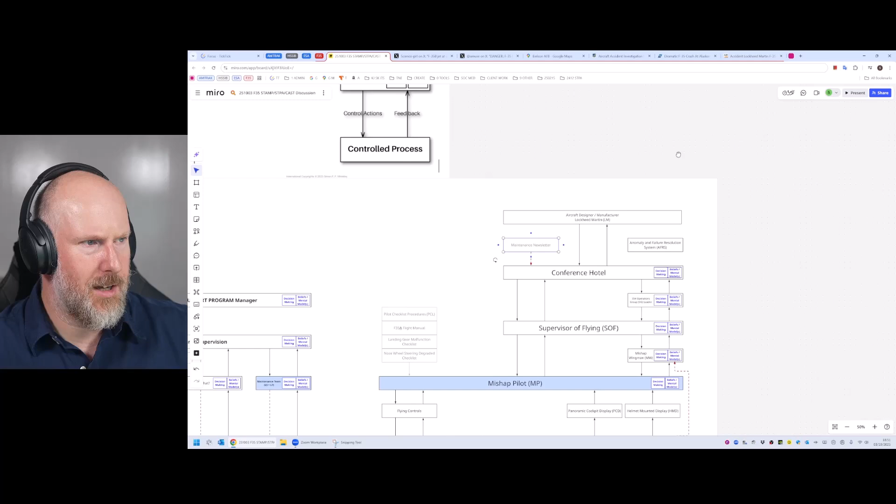But if I go back to this one over here, I just simply put it on there. There's no control actions or feedback because I don't know the detail. If I was doing the investigation, I'd ask questions about that. So we talked about that.

James, sorry James. So the aircraft - where is it? This bit. So the mishap pilot acknowledged the... no, it's not that one.

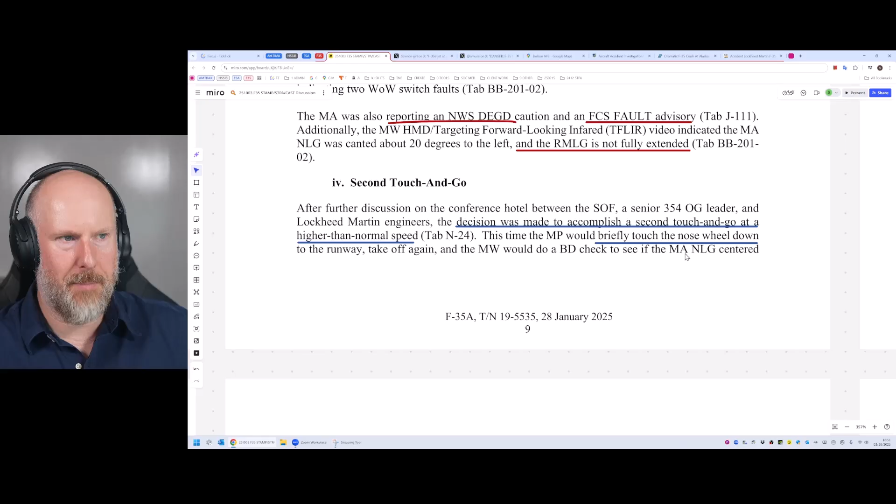There we go. So this time the mishap pilot would briefly touch the nose wheel down to the runway, take off again, and the mishap wingman would do a battle damage assessment to see if the main mishap aircraft nose landing gear centered. So it's good that they had two aircraft flying together and they had enough fuel and the weather wasn't so bad they couldn't do this. So this was perfect conditions for this. We should learn so much from this.

The mishap pilot acknowledged this change of, what was it, COA? I can't remember - course of action, there we go, that's it. The mishap pilot acknowledged this course of action and proceeded to the visual flight rules entry point Sally to accomplish the second touch and go via a straight-in pattern.

Now notice the times on this before I quickly go into it. So 21:48 and 15 seconds, 21:48, 44 seconds - so 30 seconds between is flying okay and bang is on the end of a parachute descending to the ground. So the mishap aircraft main landing gear touched down, followed by the nose landing gear, at 21:48, 18 seconds.

The targeting forward-looking infrared, is it T-FLIR? I can't remember. Video from the mishap wingman showed both the main landing gear and nose landing gear touching down on the runway. Once this occurs, the T-FLIR video and crash survivable memory unit data showed the nose wheel went from 17 degrees left to 6 degrees left when it touched down.

At 21:48, 19 seconds, so 1 second later, the mishap pilot momentarily selected maximum afterburner. Right, okay, so your question James, the idea that it managed to use residual speed or other magic to get to that height is a bit far-fetched. The answer to that is because the afterburner was on.

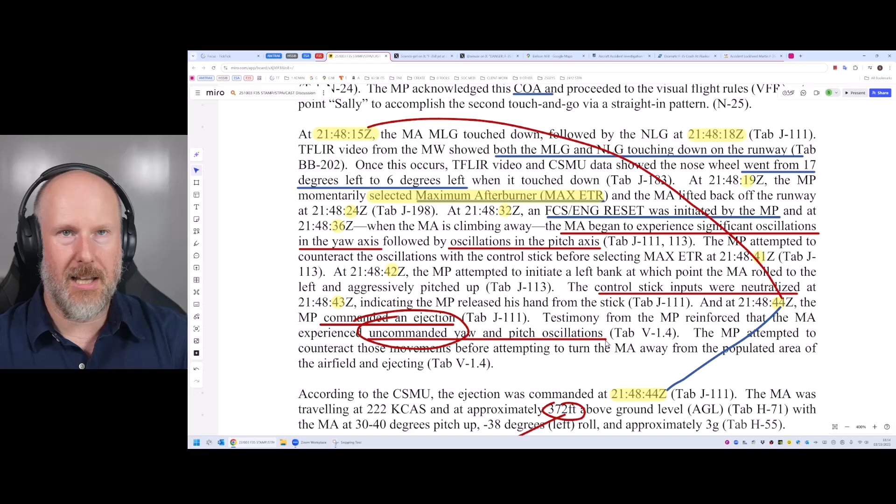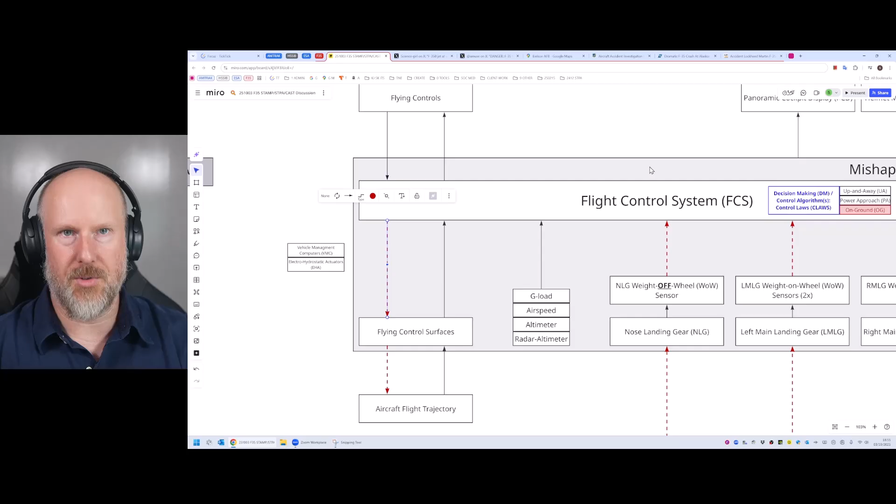So these are, if I just quickly jump over here, these are not control actions by the pilot because they released the stick. So it must have come from either the flight control system or an external interference, which is not discussed here. So it must be the flight control system that's done this for the reasons we've already discussed. Where is it? So we got back to here.

So the mishap pilot attempted to counteract those movements before attempting to turn the mishap aircraft away from the populated area of the airfield and ejecting. So they were very brave to do what they did. That's just, they deserve recognition for that.

According to the Crash Survivable Memory Unit, the ejection was commanded at 21:48:44. The mishap aircraft was traveling at 222 knots and approximately 372 feet above ground level, with the mishap aircraft at 30 to 40 degrees pitch up, minus 38 degrees left roll, and approximately 3G.

So, thank you to Martin Baker ejector seats for saving that person's life. I'm assuming it's Martin Baker, so well done. Okay, right, what else have we got there?

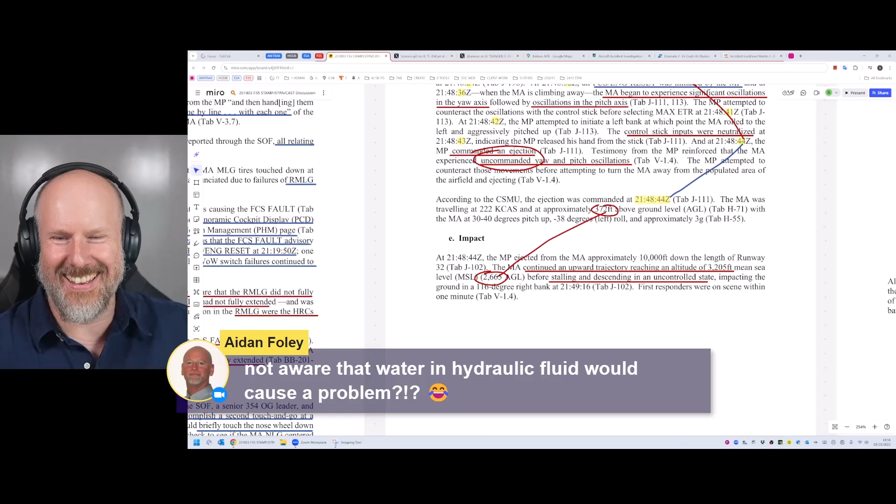So Aidan says, not aware that water in the hydraulic fluid would cause a problem. Okay, well, let's jump over here to talk about the...

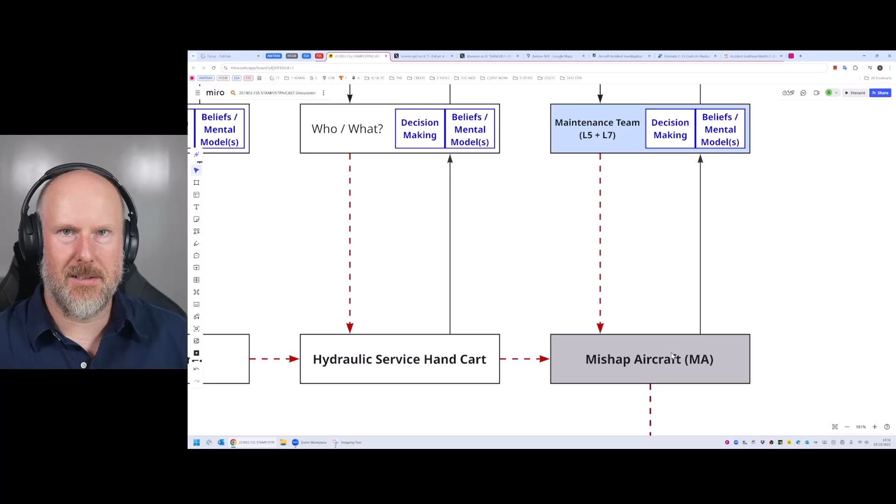So you can see these red lines, they go all the way over here, and they represent this control process here. In this context is the mishap aircraft. The mishap aircraft is under the control and influence of the maintenance team. As I mentioned, there's a level 5 and a level 7.

They made some decisions. They were told to do some servicing. They were required to do servicing, so they did some servicing. So this control action is provide some servicing. But of course, the provision of that servicing was in the context of them using contaminated equipment, contaminated hydraulic fluid.

So the question there for their mental model, if I was doing the investigation and interviewing them, say, hey, ladies, gents, why did it make sense to use this hydraulic fluid? Why did it make sense to use the equipment in the way that you did? And they'll probably say, I'm playing devil's advocate, they'll probably say, well, I didn't know it was contaminated fluid.

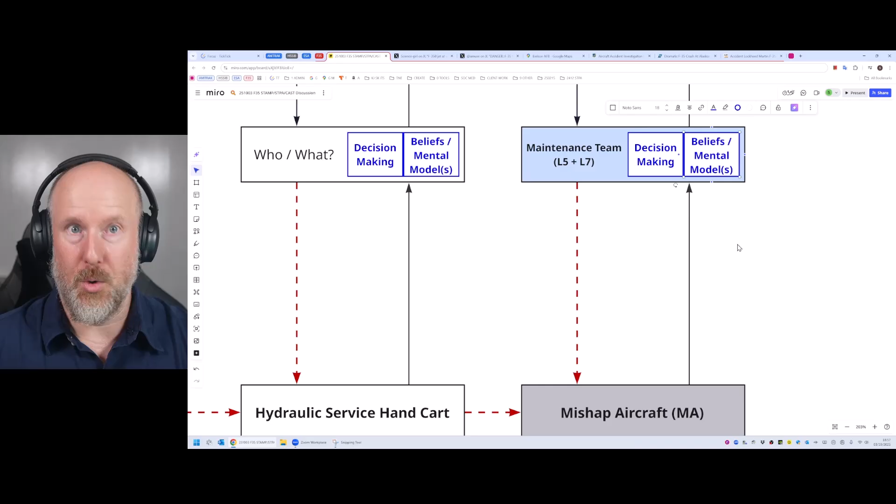Well, the investigation should establish that, but let's imagine that they've come to work to do a good job, not hurt or kill anyone. If they knew it was contaminated, I'd like to think that they would not service the aircraft with contaminated fluid. That's always a possibility.

So when we're doing a safety investigation, we have to always be open to the possibility that there is some hostile actions, threatening actions, but generally as part of a safety investigation, we don't assume that, but there's always a possibility. So let's say that they're good people, no problems there.

So they must have believed logically that it was safe to use, that it wasn't contaminated. Well, why is that belief then?

Well, perhaps maintenance supervision has said, hey, you need to use this hydraulic service handcart to do this maintenance. And they've either not got the responsibility or didn't know that they needed to check whether that hydraulic service cart contained contaminated fluid or not. Maybe they've assumed it's not contaminated because they believe that the control structure around them is functioning properly.

Now, the investigation report doesn't say who or what is involved in looking after and making sure the hydraulic service handcart is actually appropriate for the aircraft. There's no discussion of that. They also mentioned the hydraulics barrel and the control of that.

They mention a log. I've highlighted log twice because there's two different logs. One is about the hydraulics and one is about maintenance itself. And I've highlighted those orange and not added any detail because there's nothing in the report. What I'm saying is the log itself is not a controller in the conventional sense because it doesn't have the ability to make decisions or enact control actions, but it is a type of process model because a log is essentially a record of the state of the control process, and that record is used by a controller to inform their beliefs, their process model about the state of whatever control process it is.

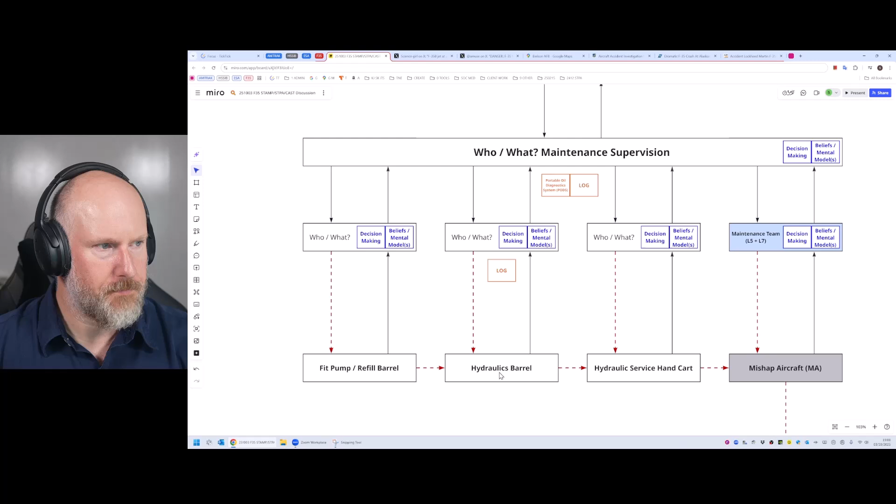So this log here, this is supposed to maintain a record of what that barrel contains, when it's been checked, where it's been stored, all of that good stuff. And of course, that should be used by somebody, we don't know who, to actually make sure that that barrel is not contaminated. And then, of course, we've got the pump and the refilling activity of that barrel.

And we mentioned earlier on, I'll just quickly jump back to the picture. We mentioned earlier on that it wasn't sealed, apparently sealed properly, if that's the case.

I don't know if I'd imagine that it should have a seal on it, but I don't know what the procedures or detail are because it's not discussed in the report. It's kind of hinted at.

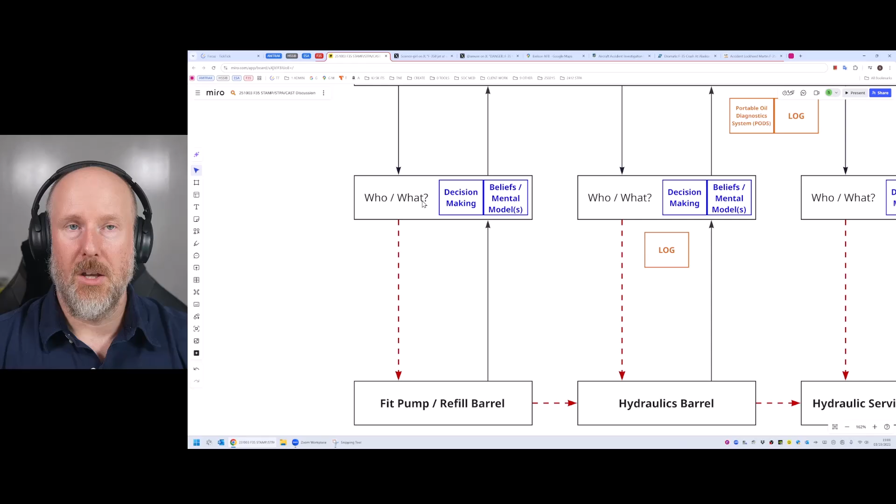So who's involved in fitting the pump and refilling the barrel? What was their beliefs? Did they believe they were supposed to fit that seal in the way that they did? Who's checking that? Is there a double check? Does somebody check that? Is the double check, 'hey mate, have you done this?' 'Yeah, I have, mate. Done.' Or is it 'have you done this?' 'Yes, I have.' 'Great, I'm going to inspect.' 'Oh no, it's not been done.' That's a different kind of double check.

And actually double checking, and the control structure that supports a double check, is a common issue across literally everything. The patient safety work I do with medication and dosing, creating a prescription, defining a dose, dispensing medication and then administering it to a person - there are checks all over that. But if the checks are not architected properly, if the control structure doesn't support it, you can end up overdosing somebody.

The same with the railway switch example I did and put on YouTube the other week, the massive 4.5-hour video. That's basically an accident to do with a switch left in the wrong position. But there's so much that I tore out of it by looking at it through the lens of CAST.

And then, of course, who or what is supervising this maintenance? Why was that dysfunctional? We don't know - the investigation doesn't talk about it. The only thing it really talks about is that the barrels themselves were apparently put in different places, they were in Japan at one point. I think James mentioned earlier that the barrel had a label past its use-by date, and apparently the barrel had been reused, but we can't confirm that because the logs were not kept up to date.

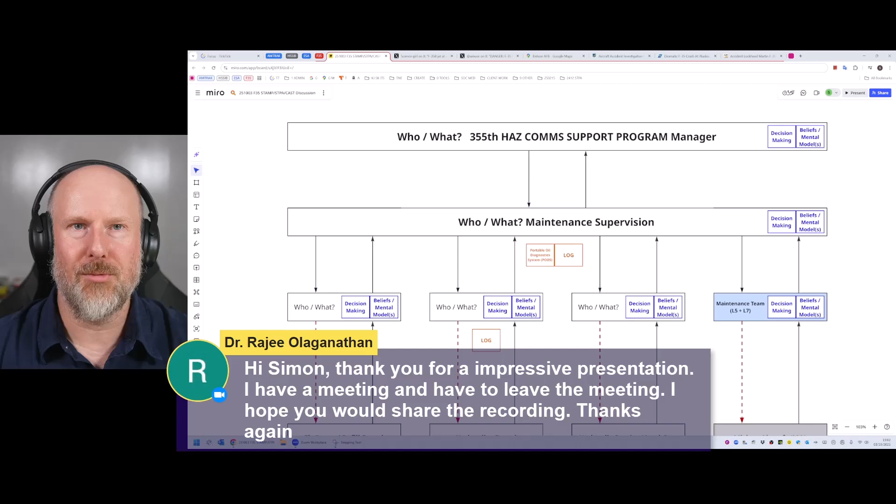I have a meeting and have to leave the meeting. Oh, fantastic, okay, well, thank you. Hope you would share the recording. I'll see what I can arrange. Thank you, it's great to see you.

Karel asks: my question is how to avoid situations like this, if trained staff is ignoring simple rules about protection of aircraft systems from water. This topic is an important part of any training of maintenance staff.

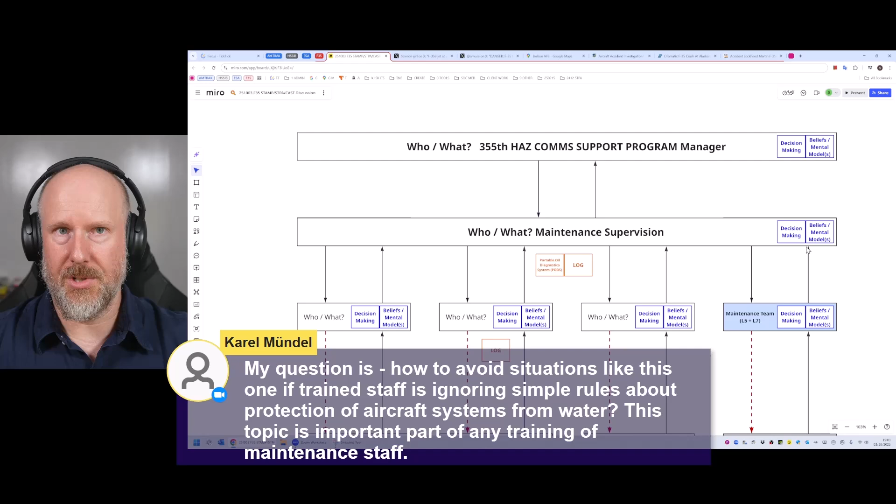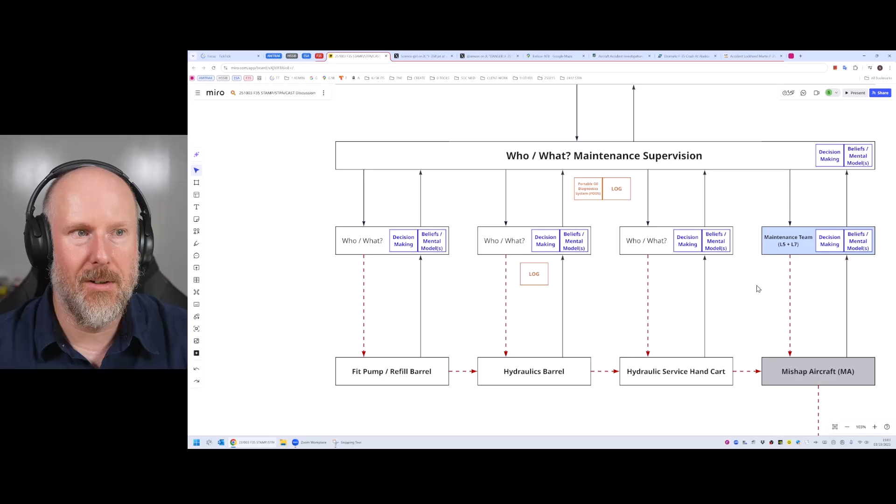That's a fantastic question. As part of this control structure model, if we were involved in the investigation, we'd go and interview these people, look at their maintenance procedures, look at their policies. We would talk to them and ask, starting from the physical process - maintenance team member L5, L7, why did it make sense to use the hydraulic service handcart? Do you know who is involved in making sure that hydraulic service handcart is serviceable and appropriate for putting stuff onto aircraft? Do they know who's involved in hydraulics barrel control and monitoring? Do they know who's involved in fitting the pump and refilling the barrel? These people, if I stretch this, might literally be involved in all of this. It might be that they are the key people, but we don't know that - I'm just postulating now. So yeah, it's great you're asking those questions, there's loads of stuff in there.

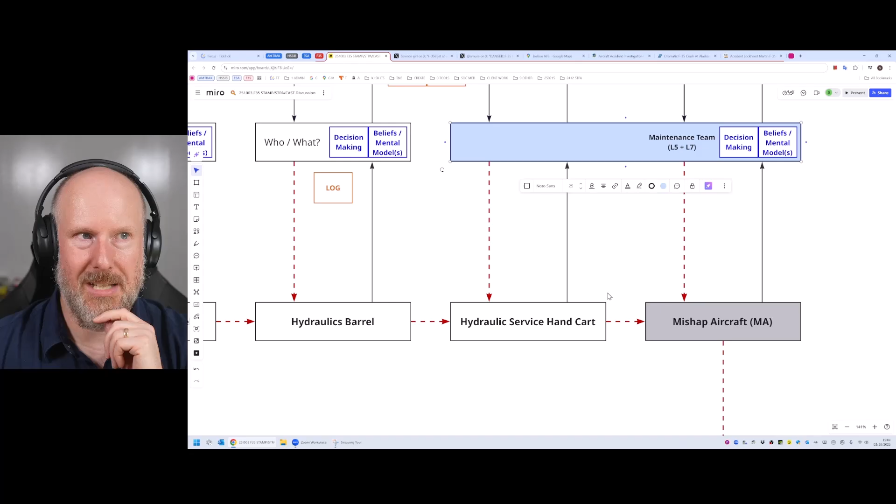In terms of training, what training does is it essentially improves or gives the people involved new abilities to make decisions, new control algorithms, perhaps even new control actions or different control actions, or specifies how they should provide control actions and in what order. For example, to prevent this kind of thing happening again, the new control algorithm might be: you must check the hydraulic service handcart and the quality of the fluid in it before you use it. So you're expanding their responsibilities for the hydraulic service handcart, and they're now responsible for doing that check.

But again, if they're using equipment like this portable oil diagnostic system, and maybe there's only one available on the squadron for argument's sake.

If someone else is using it, maybe if this aircraft needs to get on the flight line and go flying immediately, maybe they'll decide not to do that. So there's a lot of human factors aspects there as well that we could explore, but we don't have enough information in this investigation report to talk about it.

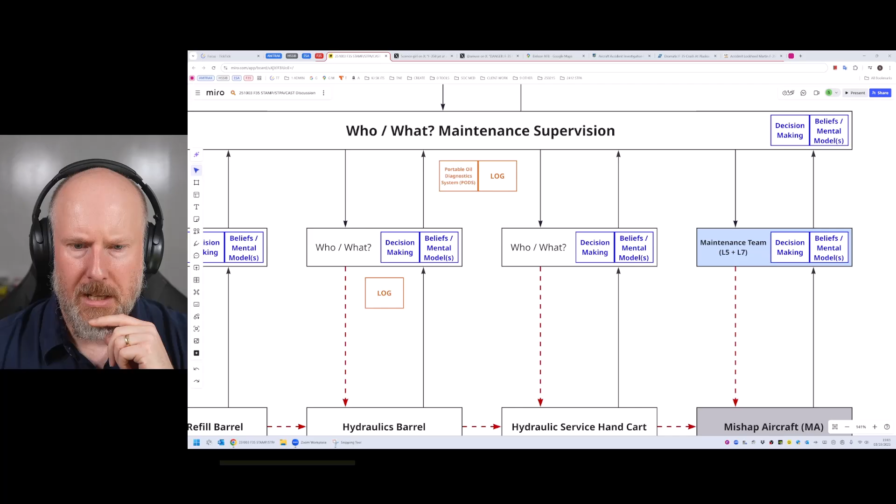Jose, STPA can be used to analyse this situation, which is complex due to work pressure. Yeah, absolutely, we can certainly do that.

Okay, so I'm just looking at the clock. There's so many more things we can talk about. I'm open to you to consider what do you want to talk about. It's open to you, tell me what you think. You're welcome to type in the chat, or you can put your hand up and I'll bring you on the screen and we can talk about it.

Dave Cummins, hello mate, good to see you. Do you have any clear recommendations you think should be made or could be made from the STAMP perspective?

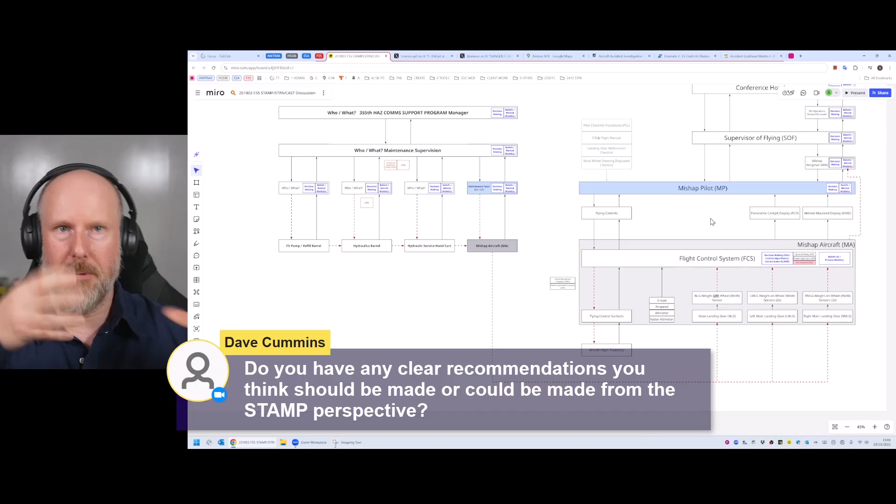There's three critical recommendations I would make from the work I've done. The first, the most critical thing, is this flight control system design. I am really uncomfortable that it appears, based on limited information in this one investigation report, that the process model inside the flight control system software is reliant only on these weight on wheel sensors, and that feedback is inadequate, because there must be other feedback available on the aircraft via the data flying around the aeroplane, that I'm sure wouldn't be too difficult to make available to the flight control system. And I probably deserve a slap for saying that, because these systems are very complex, and maybe what I say sounds really basic is maybe 50 million to fix, and maybe 50 million's worth it if you lose another aircraft, to put it that way.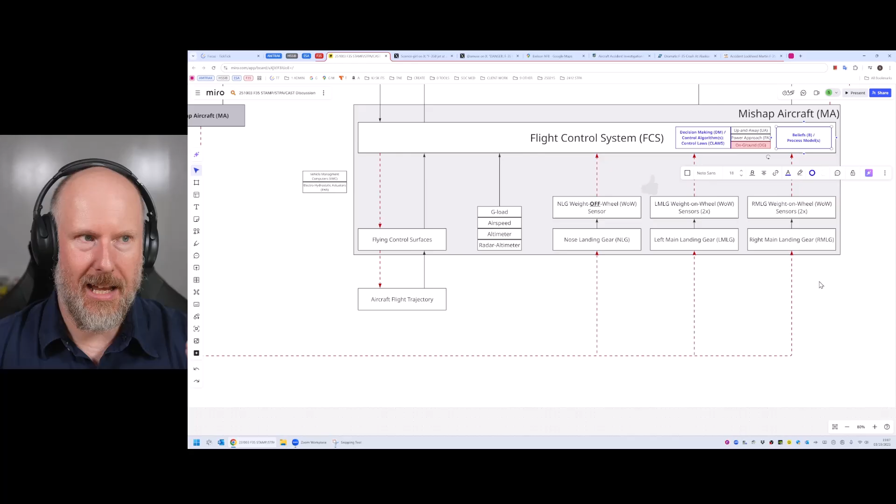So that's the first thing. The second thing related to that is this weight on wheels logic. Is that really a robust, high-integrity feedback path that gives the aircraft a true belief that it is on the ground or in flight? And I would argue that perhaps they might want to consider, if not already, some kind of pilot override. Like if you literally select full afterburner immediately after taking off again, the aircraft should be able to know that that's the state it is in.

On civil air transport, you've got the take off and go around, TOGA. So when you slam those throttles full forward, a switch or two switches, depending on the architecture, will feed back into the throttle control system and into the thrust control system to tell it, and the flight control system, hey, we're at full power here. Don't go doing anything silly like initiate thrust reverse or something like that. And in fact, some aircraft and some accidents have occurred because of coordination issues between thrust and thrust reversers, auto throttle and thrust reversers. I can't think of a specific example, but there has been a few near misses with that.

But again, STPA is perfect for that kind of topic, because it's an issue with complex interactions and timing, and STPA is perfect for that. That's what it's really good for. And as I said, Air France 447, I think, is related to a similar sort of thing, though not weight on wheels, obviously - more to do with flight data.

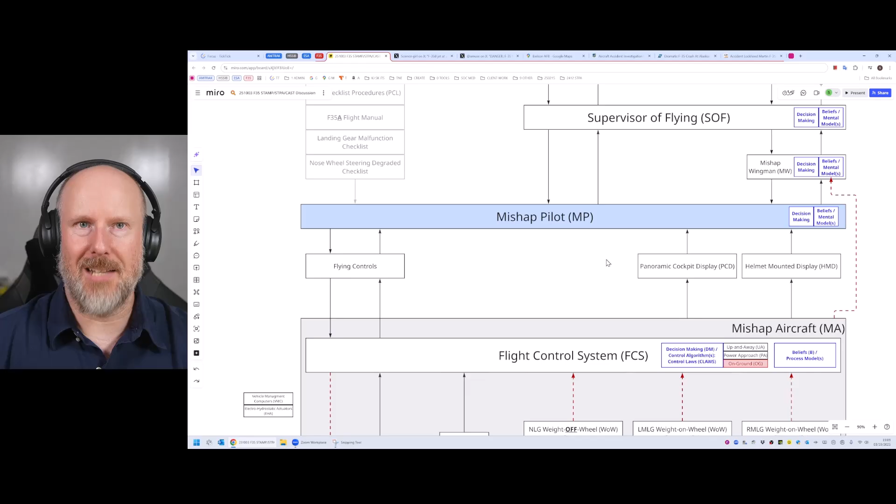So I don't know if that's available or not. But those are the two. For me, if I was working for Lockheed Martin and supporting them, I'd be drilling into this like crazy, getting everyone together.

And that video of the F35A I showed you, I'm hoping you can start to see - hang on a minute, I've just watched this video, I've modelled this control structure in my brain, and I can now postulate how this accident's occurred. There's something wrong with the process model in that flight control system. It must believe that it's falsely on the ground when it's not.

The second thing is this conference hotel. The control structure for the conference hotel and the ability to make a phone call while the plane is in the sky - that just blows my mind.

That should be audited and looked at with a control structure. Who are the SMEs, subject matter experts, in that conference hotel? How reliable are the communications connections? You don't want the cleaner inadvertently pulling a plug out and plugging the vacuum in and turning off your access to the conference hotel with the aircraft.

The second thing is that the makeup of that team - my view is you must have a set of people commensurate with the functions on the aircraft, present in a shift online, ready to go whenever the call comes in.

Past experience, 20 years ago now, when I was working at Rolls-Royce, I was working in technical support and overhaul, so I was looking after their large fleet jet engines, the big engines for 747s, 787s, Airbus A380s and stuff like that. And they established a 24-hour control centre that was manned with people that knew everything about everything to do with the engine and the aircraft and the interfaces and all the components.

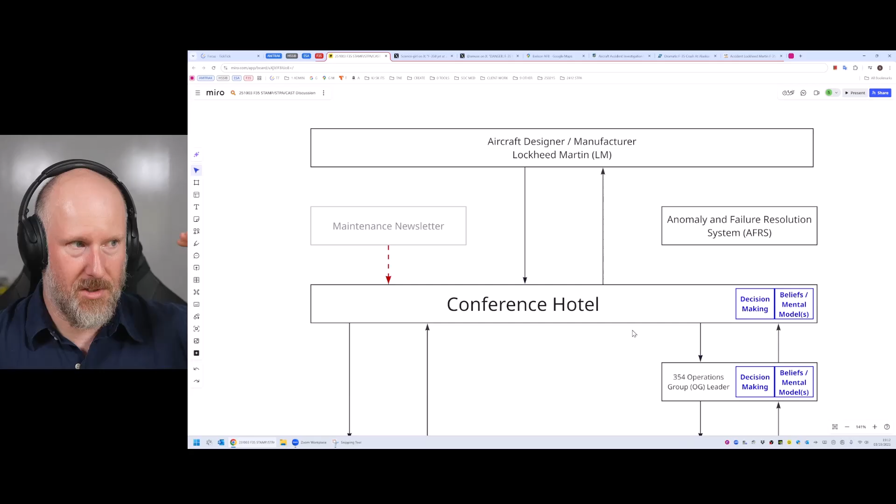But also it meant that the people in the teams became technical experts in pretty much everything across the team. So it was great for everybody, but obviously it was even better for safety. So my second recommendation is we need to seriously sort out this conference hotel - this is a safety management system issue here. So again, Lockheed Martin, US Air Force, Department of Defense, something needs doing about that, because that's going to contribute to other accidents, I would suggest. That's the second big issue.

The third issue is from a maintenance perspective, and I think you've already highlighted this. What the heck is the control structure for making sure these very expensive, high-performing aircraft - what is the maintenance for that? What is the control structure for that? And I'd obviously focus firstly on hydraulic servicing, but I'm sure you know where I'm going with this.

This accident indicates that the control structure is inadequate in some shape or form. So what does the control structure look like? Who or what is involved in it? What are the interactions between them? What are the unsafe control actions we need to protect ourselves from? This is just highlighting one example of one major weakness with that control structure, whatever it looks like.

So I'd argue, because that control structure also does other maintenance and servicing, there are other risks not related to hydraulics to the aircraft and their safety, but also from an occupational health and safety perspective, because these are hazardous materials. You don't want to mess around with hydraulic fluid, and when you're operating and working with the aircraft, you've got high pressure energy in these oleos and other things. You don't want that control structure to hazard the aircraft. So that's my third recommendation.

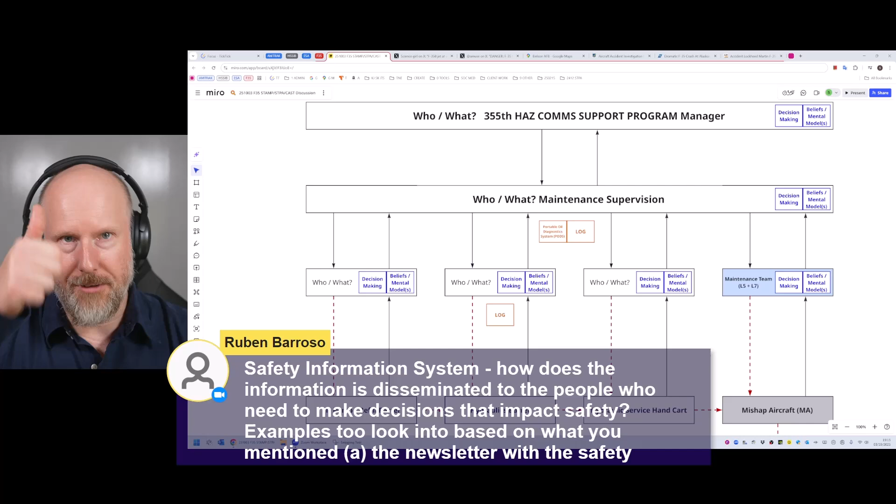Examples to look into based on what you mentioned are the newsletter. Yeah, fantastic, that's over here. So actually, that's my fourth recommendation. What the heck is going on with these maintenance newsletters? I'm not being funny, but that should not be a newsletter. That should be a formal safety signal of some description that everybody must be made aware of, and there must be some kind of feedback to confirm that they understand it.

Now there's a bit of a balance to be had, and the example I'll give is from 20 years ago. I used to be a glider pilot, conventional glider, supporting an RAF volunteer gliding squadron. One of the things we had to do was read all the notice to airmen, the NOTAMs. I'm not joking, it was like this thick, an A4 binder full of NOTAMs. The airfield we flew from, RAF Syerston, was in a location with a lot of other RAF stations around it, flying training stations.

Of course, you don't want a glider and a fast jet to come into contact. When driving the winch, because these were winch-launched gliders, I used to drive the winch - it was fantastic. You don't want someone to go flying through the cable when you're winching someone into the sky. So there's a lot of NOTAMs you have to read. And from an operations perspective, a glider doesn't have an engine, so you need to have your wits about you when you're doing that. So yeah, the safety information system is absolutely critical, and that would be my fourth recommendation.

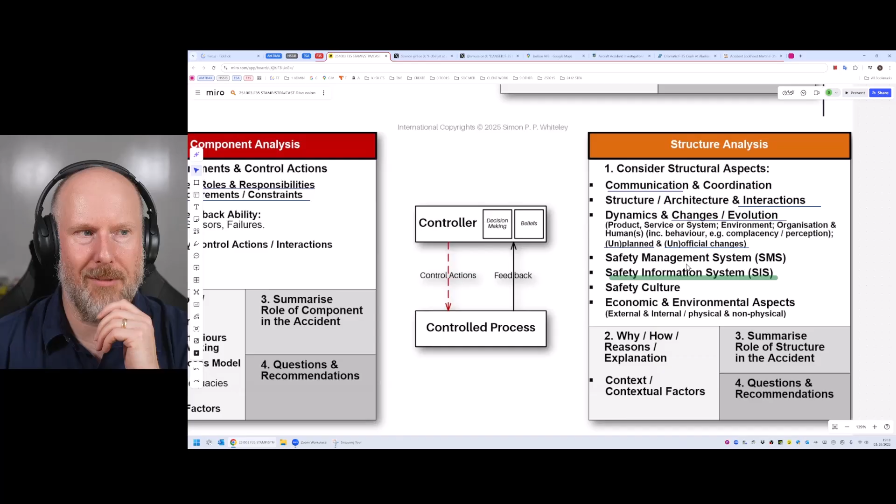Because the doses were administered over the weekend and those doctors were not available, they didn't detect the issue until later on. Some people argue electronic patient records aren't a medical device or don't affect safety, and emails should never be used to communicate safety-related information because they're not reliable - not everyone's going to get it, and how do you confirm everyone's received it? What I'm highlighting is, if you're communicating safety-related information, it should really be formalized in some shape or form. It shouldn't just be an email or a newsletter, it should have appropriate integrity. And I think I've banged on about that a bit much.

So what else did Ruben say? Let's just get that back on the screen again. So it doesn't quite fit on the screen, but let me get the last bit. So the newsletter and the safety advisory, yeah, absolutely.

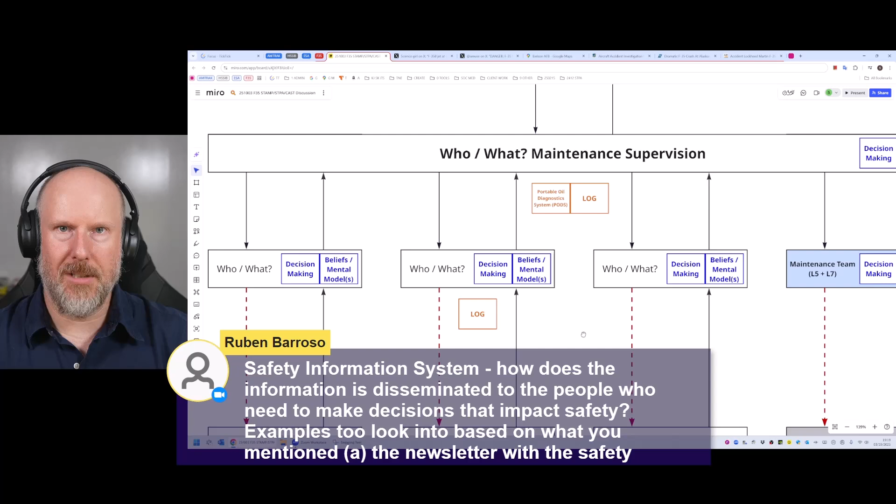B, keeping logs up to date, probably others. Yeah, so these logs - the logs about the hydraulics barrel and the use of the portable oil diagnostics system, so the actual sensing of what's in the hydraulic fluid and whether it is contaminated or not. Yes, those logs are part of the safety information system.

So Kevin Hayes, I was surprised that water in the second aircraft was not detected until a near miss happened.

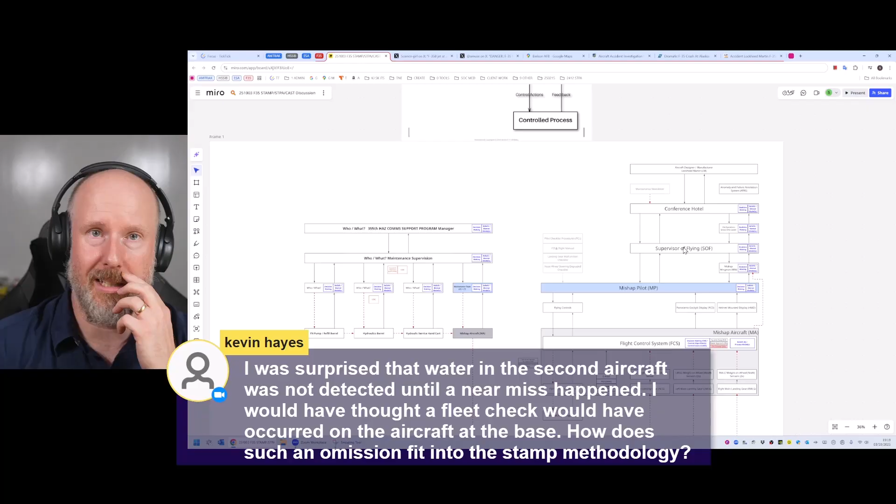Ooh Kevin, fantastic, that's something I've not modelled in my control structure. That's a good one. So what you're saying is the feedback from this accident, this control structure, how does that feedback, knowing there's been an issue, an incident, how does that actually find its way to operational flying, from frontline flying?

No, it's a fantastic question. I'm pleased you've asked it, because it's something I need to emphasise in the future. This case study is purely about what's in that investigation report, and I'd not appreciated the point that you've made. I just focused on this particular jet, and I didn't bother to go and model the control structure for actual flight operations and the feedback loop that is essential between this investigation and this accident and flight operations.

And so the way that I would address that is I'll just quickly put my slides back on the screen so you can see. No, not my slides, live screen. There we go. What I would do is I'll just quickly duplicate this and put it down here like this.

What I would do is recognize that these go to all the jets, not just this particular one. So that maintenance aspect there, it's all the jets. So whoever's interfacing with those jets, if they're using the same hydraulic handcart, they should have dealt with that.

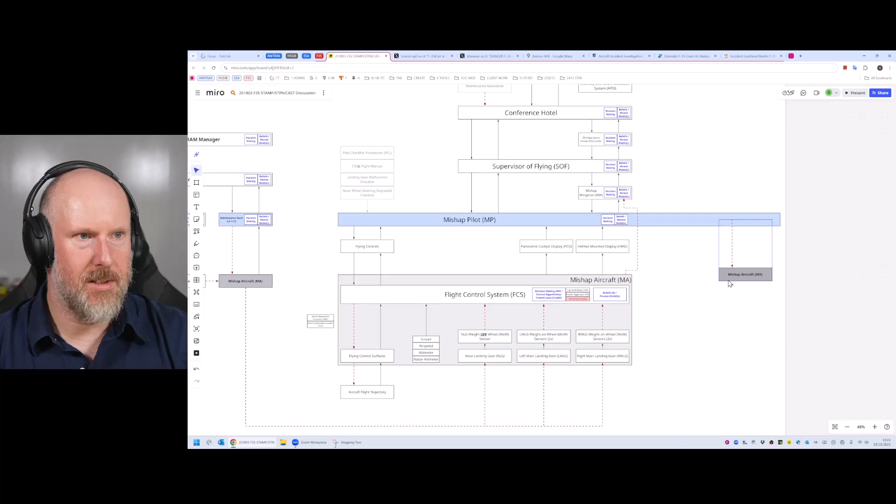But from an operations perspective, I'll just move this over here like this. I'll stretch this controller over here like this, and I'll highlight that there's other jets that they need to take care of. So other jets...

Flight line, what are they doing about that? Are they providing other control actions to that? They say, look, we've just had this near miss with this, we had this crash with this jet. What does this control action look like? Ground other F35s, check for contamination. Is that a control action that they should have immediately provided? Did they provide it? If they didn't provide it, why did it make sense not to provide it?

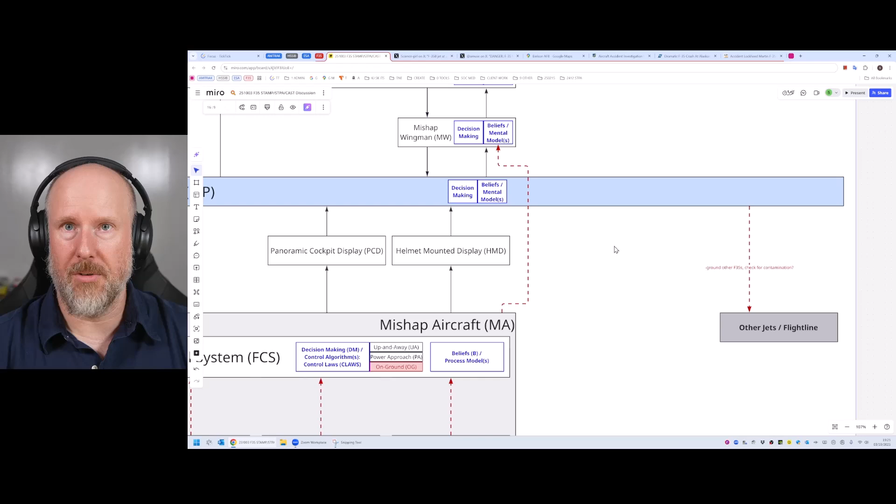That's a fantastic question. I don't know how we could answer that. And the same... Oh, exactly, yeah, why didn't they pick it up?

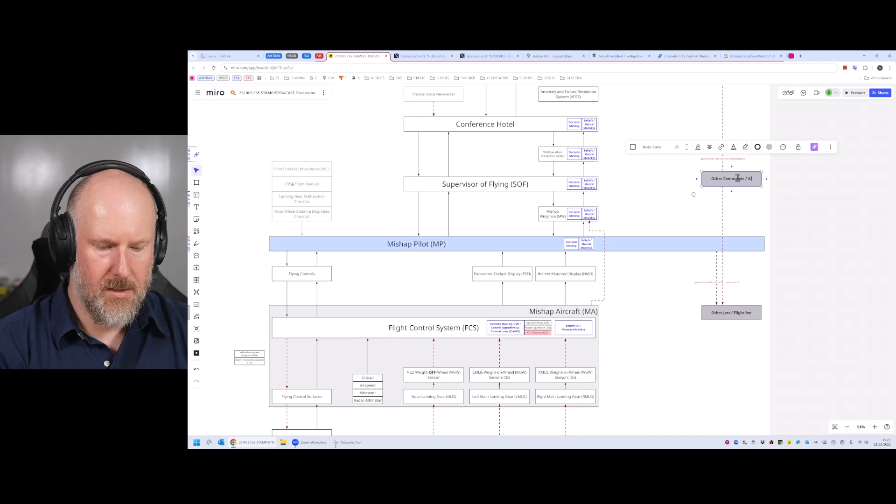And I suppose you could also say it should also come from the manufacturer, and that would go to other... sorry, I'll put over here, other commands, Air Forces. There we go, that control action should go there as well from their perspective.

So has that gone out? Did it go out? Don't know. Yeah, it is a bit strange how the aircraft got took off. I'm so pleased you've highlighted that, because that really brings this to life.

But yeah, what other things would you like to talk about? Are there any other questions or comments or concerns? So there is HFACS. Some of the language in HFACS does cross-link with the language used in STPA or CAST,

but it's not a complete one-to-one relationship. There are things in HFACS, and everything in HFACS, in my opinion and experience so far, is covered by STPA or CAST in the type of control actions, unsafe control actions definitions - so timing, duration, sequence, and all of that stuff.

And then in terms of acts, I don't know if you can see on the screen, is it big enough for you? I'll just zoom in. That's as far as I can zoom in. Is it big enough for you, that, or can you see that?

Yeah, so 4 main categories in HFACS. So acts, you could say that is a direct read across to control actions, or unsafe control actions, contributory control actions. Preconditions, that could cover things like beliefs or decision making, or maybe the context within which a controller is doing some activities. Supervision - so in the case of maintenance, there was a lack of supervision because there were no clear controllers in the higher level parts of the control structure. And then organisational influences kind of covers those aspects as well. It's kind of overlapped, so there is a synergy there, but it's not a direct read across.

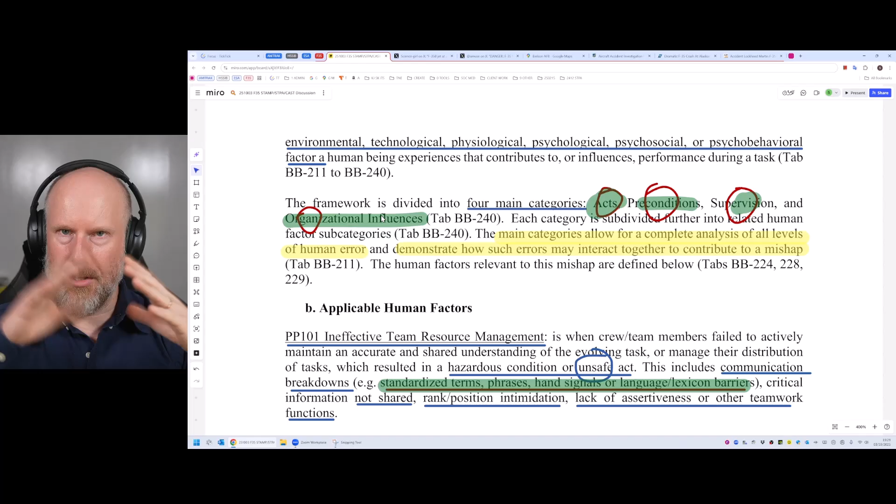And as you quite rightly point out, the ones highlighted in the report are quite high level. But I'm hoping you can see from what we've done tonight that if you had the detail, if you were part of the investigation and could ask the questions, using that control structure model, you could drill so much further into why did it make sense for this controller to behave the way that they did. What were your beliefs? What were the control actions you provided? What were the interactions from above, from elsewhere in the organisation? What contexts?

Why was there such a high staff turnover in the maintenance team? I said this on the podcast with TJ Candy last week: if you have high staff turnover in your safety control structure, that indicates something's not right and will likely have a consequence for safety. People and leadership should pay attention to that. But if all layers of leadership are suffering the same issues, it's kind of inevitable that a near miss or something more serious is going to happen.

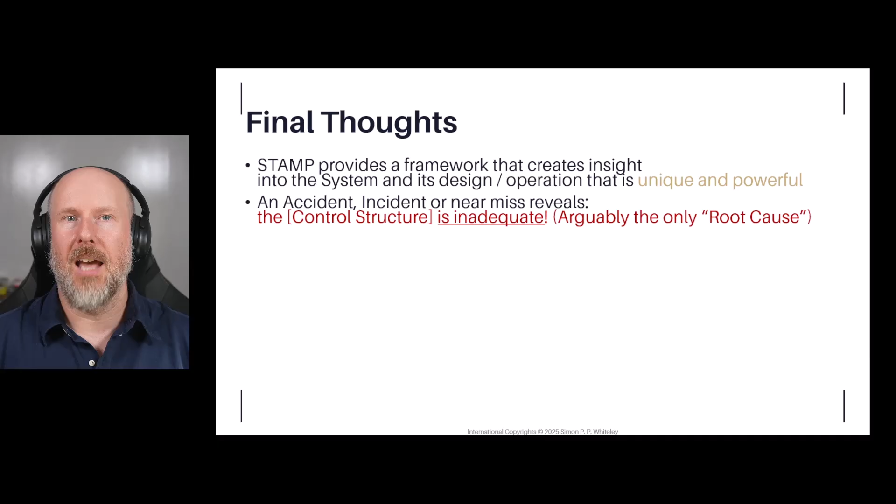An accident, incident, or near miss reveals the control structure is inadequate in some shape or form. If we were talking about root cause analysis, and I'm going to be a bit facetious here, for me the only root cause is literally that the control structure is inadequate in some shape or form. It could be inadequate in one place, or in many places, and I'm sure you've seen from this case study today that there were inadequacies all over the place, and we basically wasted $200 million and nearly lost another $200 million 8 days later. So this approach can save megabucks.

Stamp-based analysis focus is on the control structure and controller behaviour and interactions. It is not just failures, it is about failures and dangerous successes. It goes beyond failures and faults, and includes dangerous successes.

It's especially good for dealing with software. If you talk to people who talk about software failures and failure rates and trying to put numbers on things, this stuff will annoy them because it removes that burden. You don't have to worry about numbers now, unless of course your regulator wants some rubbish made up numbers, then crack on. But if you want to actually deal with safety issues, then this is the way to do it.

This is a massive point, you've seen from this investigation report we could have saved $200 million. We could have saved another $200 million 8 days later had we had Kev on the team, and Kev said, hang on, what about the other aircraft in service? So this is very valuable, what we're talking about here, and it's very important.

It will save lives, especially if you do it early in the system development life cycle. If we'd have parachuted in with those Lockheed Martin software control system engineers and said, hey, it'd probably be a good idea to have more feedback into our process model than just the weight on wheels switches, they'd say, oh well, the weight on wheels switches have a failure rate of 10 to the -7, so we don't need to worry.